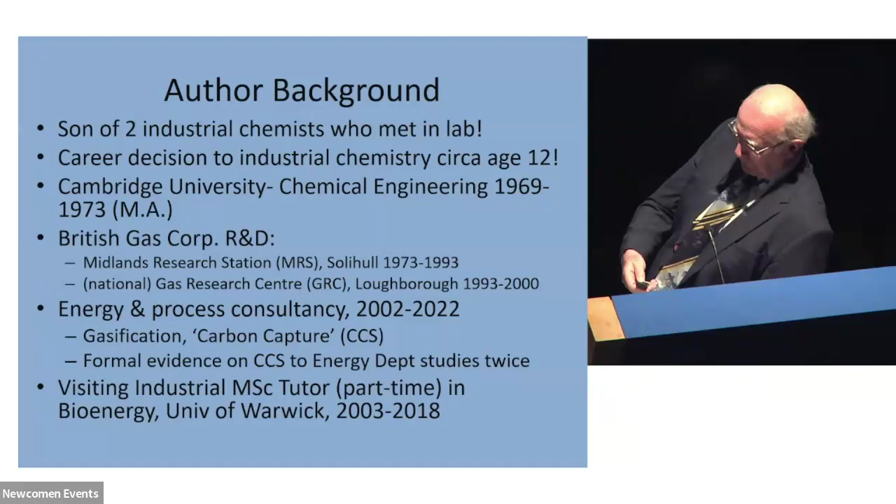And the forward. Damn forward clicker's not working. Oh, right, we got there. Okay.

Chemical engineering is riddled with jargon that's specialised to the sector, and British Gas is riddled with gas jargon as well. I've really tried very hard to eliminate as much as I can, but there are a few things left. I'm going to have to use a set of acronyms just for ease to speed the thing up. So here's a few of them. So NG is natural gas, MRS, Midlands Research Station, where I worked, TG, town gas.

Now I'm very fortunate with my audience here. I'm sure all of you in the live audience are old enough to remember when we had to make gas before it came out of a hole in the North Sea. And most of you are old enough to remember the old-fashioned gasworks using coal that you could smell from about 5 miles away. We'll be talking about that technology quite a bit.

One very important thing here is CV, gas calorific value. It's always done by volume in the gas industry because what gas pipes transport is volume rather than mass. So when we're talking about different gases, we have to look at their heating value by volume. Combined heat and power I'll mention briefly. US Department of Energy will feature at one stage, and there's a few units at the bottom here.

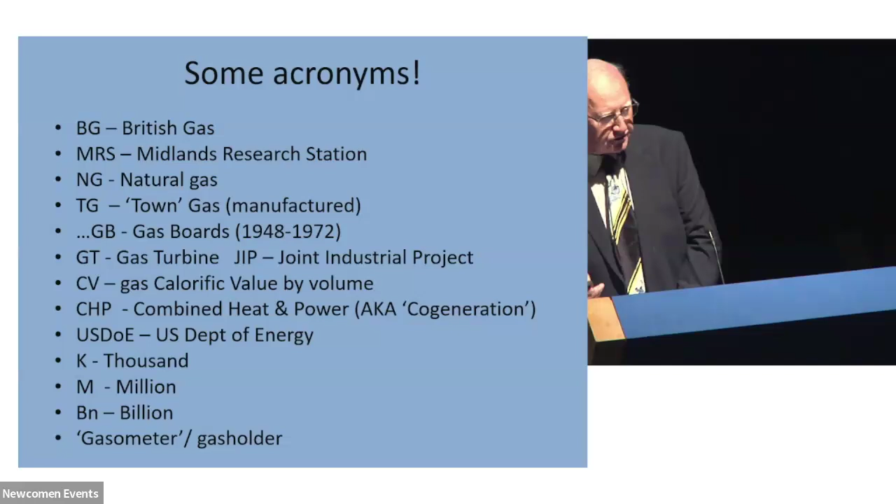And then the vexed question of gasometers. Everybody called them gasometers. That's not the technically correct term, they're gas holders. The gasometer was something that looked like a miniature version of a gas holder that was used for metering gas in the early days, and hence gasometer. But I'm going to use the terms interchangeably here because I know most people are familiar with gasometer. Okay.

So what we're going to do first, we're going to have a very brief romp through the history of an entire industry from 1793 to about 2000. And we'll just whiz through what the industry was up to. I'll then rewind back and we'll talk about some of the technologies in more detail.

So the original purpose of gas was for lighting, long before gas cookers or gas fires had been invented. And the main initial purpose was street lighting, but also lighting for factories and eventually lighting for the home. So the basic discovery, small-scale R&D, call it what you will, was the famous engineer William Murdoch in his cottage at Redruth in 1793 in Cornwall. You can still see the cottage, we'll see it in a minute.

The interesting thing is what happened next. Most people that know anything about the history of gas have heard about Murdoch and his cottage. Murdoch and his cottage don't make an engineered process that you can sell to anybody. So there then has to be an industrialisation of the process on a rather larger scale before you can use it for lighting Mr. Lee's cotton factory in Manchester. Well, all that work was done at the Boulton and Watt Soho Foundry, Boulton and Watt's second premises, which is still standing. And we actually know from historical records which room all this development was done. It was in a basement cellar.

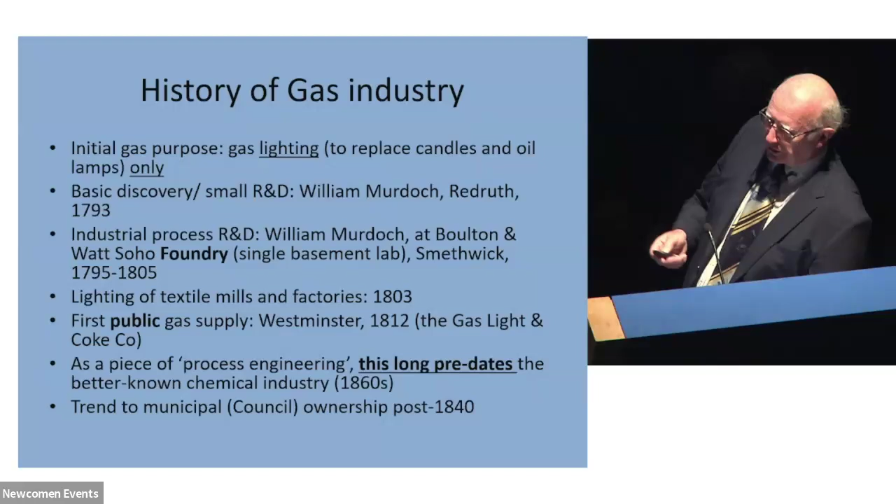Whiz through the history. I'm not going to describe all of these in detail. Boulton and Watt sold their first factory gas plant in 1803. From then, there's a few changes to the size and shape of the equipment, but basically the technology sort of stagnates for a long time.

The 1850s, they're starting to add other processes that are needed for winter peak demand. It happens with lighting because there's longer nights of darkness in the winter. And of course, once people start buying gas cookers and gas heaters, the winter demand starts picking up quite a lot. Well, that's a problem because the basic gas retort Mr. Murdoch was playing with isn't really flexible. You can't really switch it on and off. It has to be kept hot all the time, a bit like a blast furnace. So you need something else that can be switched on and off. And that's the producer gas process using air, the water gas process using steam, and then its improved version, the oil carburetted water gas process.

In terms of utilisation, as well as street lights, we have the limelight. Everybody knows the name. It's a real technology. You squirt a highly intense Bunsen burner flame at a piece of lime and it glows. So most places were using that. Gas cookers and gas fires and water heaters come along in about the 1850s. And it's a jolly good job they do, because in 1882, the first coal-fired electric power station opens in London at Holborn, Mr. Edison. And rapidly people realise electricity is really a far better method of providing light than gas is. Well, gas has to fight back.

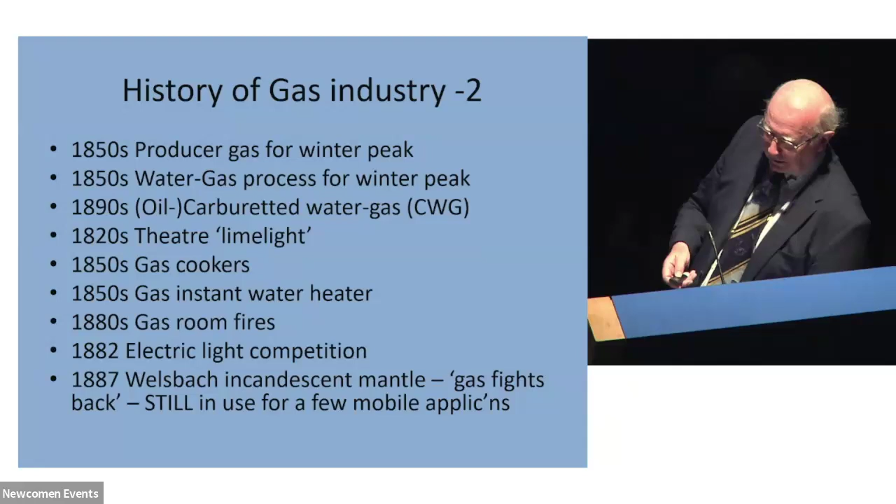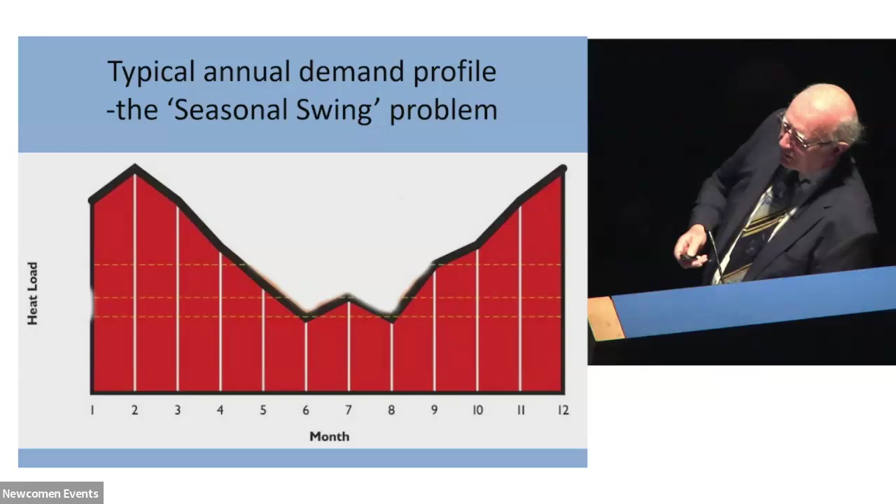How can you manage the gas system that flexibly? Well, can't we store it in those gasometers? Well, no. Gasometers are only capable of handling the swing between day and night, which is a very similar graph to this. You know, not many people use gas in the middle of the night once all the gas lamps have been switched off. So the gasometers are doing the day to night swing. They simply don't have anything like the capacity, even though we had a fleet of about 800 of them, they didn't have the capacity to do this seasonal swing. So we'll talk about the technologies that are used for that when we get further in the talk.

Right, I want to talk about CV, and I want to talk about a thing called enrichment. If you're going to change the type of gas you use, everybody's already got existing burners that fit the gas that came out of Mr. Murdoch's retort. If you now want to do something different, you've got to match the heating value, approximately, not exactly. It doesn't matter if the mixture of the molecules is the same or not. What matters is the heating value. So we're looking for a CV in old money of 500 British thermal units per cubic foot.

Now, the problem with these seasonal processes, these ones you can switch on and off, the producer gas is only about a third of that. The water gas is only about 2/3 of that. What that means is you can only blend quite small volumes of it into the main gas. Otherwise, the average heating value will drop too much.

Well, that was all solved with the carburetted water gas process, where some bright spark about 1900 realised if you squirted hot oil into the exhaust of one of these water gas generators, it would crack to smaller molecules like methane, and you could actually produce exactly the mixture you were looking for. Incidentally, the carburetted water gas process is one of the first ever processes to be fully automated, long before the chemical industry were doing it. They had crude forms of automatic control on these plants.

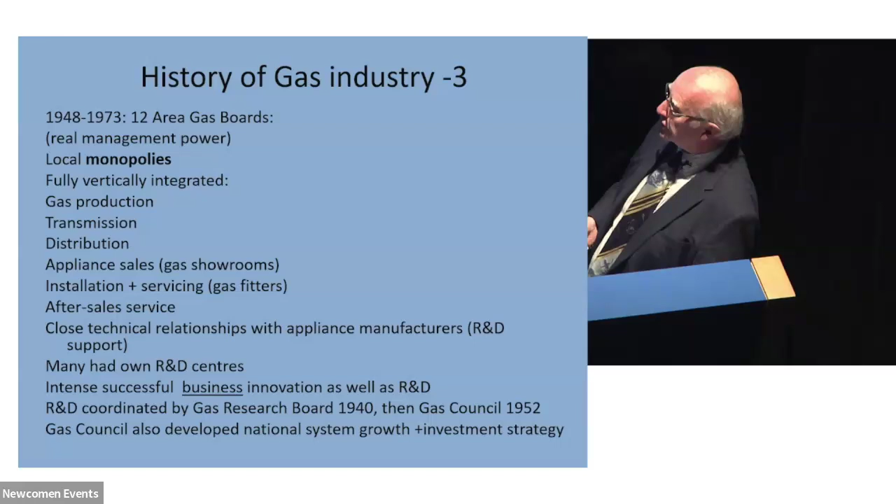They provided after-sales service, and they had very close technical relationships with the appliance manufacturers. They didn't actually manufacture the appliances, but they had a lot of influence in what the manufacturers did. So this is an era that some of us will fondly remember from before privatisation. Most towns had premises like this.

So here's our local West Midlands board example. There's a photograph of its headquarters top left. The current headquarters, well, I say the current because it's gone now, but the one from the 60s to 80s was moved into Solihull in a brand new building in 1962, and that was on an old gasworks site. There's just an air photograph of the old gasworks that was there before. And this site was actually shared with the research centre where I worked.

The company did a lot of business innovation as well as technology innovation. They really were right at the cutting edge of things. This was the largest open plan office in Europe when it opened, with over 1,000 people in it. It was so large that the postman had little electric trucks to drive between the desks. The business chief executives came from all over Europe to see this office, to learn how an open plan office worked.

They deployed the UK's very first private microwave system, and that was handling billing from 3 million customers over a range of about a 50 miles radius. All the calls were being funneled into this one centre, and what they were doing there was what we now call the call centre. So if all of you hate call centres, you now know who to blame and where.

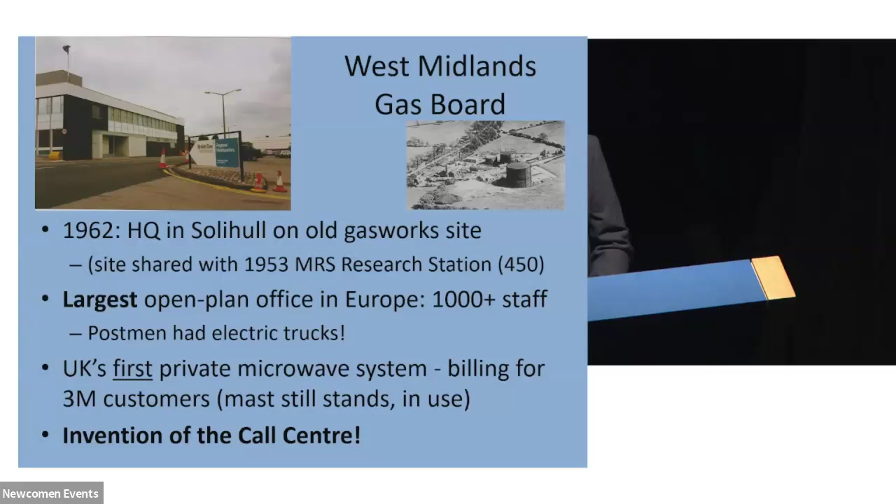The nationalised company inherited a stagnant and dying industry. The technology had not changed significantly since 1793. They were still cooking coal in pots, they were just rather bigger pots with a different shape. And the technology was stagnant. The technology required special grades of coking coal because you want to sell coke as a byproduct. And they were becoming increasingly short supply, and when that happens, the price goes up.

Unfortunately, the price they were getting for the byproducts of this gasification, which were mainly coke and various chemicals, were all tending to decline at the time, so they were in a real crunch. The processes were extremely labour intensive, with high labour cost, and recruitment was getting more and more difficult, and in a few slides we'll see a picture of why it was getting difficult.

The equipment had very high construction costs, inflexible production, and overall, the industry had an old-fashioned and dirty public image, just the same problem that steam engines had in British Rail in the run-up to 1968, versus electricity looked clean and modern. And electricity competition was increasing across the board, not just in the home with things like storage heaters, but in industry as well. So there's a graph of the stagnation.

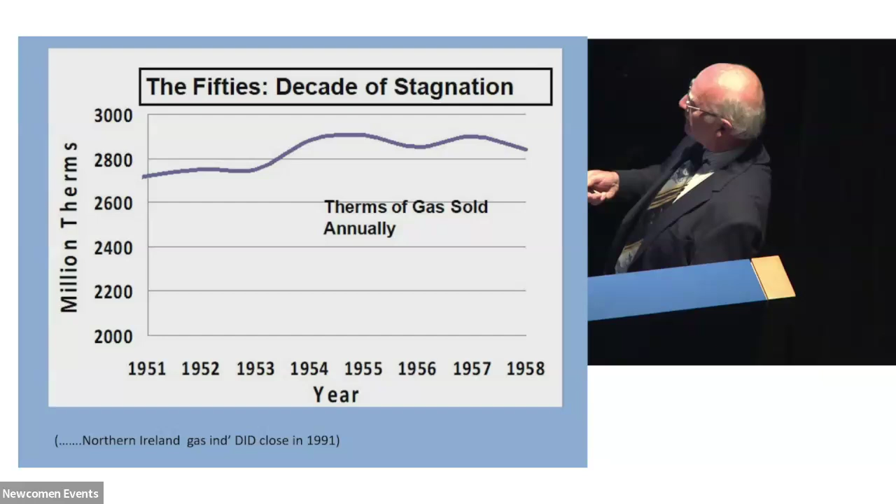So, what research do we need to kickstart this old, dying industry into something that's got a chance of survival? Well, we're very used to using coal. So step one is let's use advanced coal gasification, and we'll be seeing some pictures of this in a bit. The advanced version of the gasification can use a much wider variety of coals, so you're not restricted to these expensive coking coals. It's higher efficiency.

But more importantly, it's at higher pressure. And when it's at higher pressure, all the equipment squeezes down. If you double the gas pressure, you physically halve the size of the equipment. That makes it possible to build giant gasworks. So, for example, you could have one works supplying half of Birmingham. That was never possible under the old system, where Birmingham used to have about 10 gasworks with the old technology.

And the one that was chosen was a thing called the German Lurgi process. Lurgi is part of the word metallurgischer, because it comes from the steel industry. It's a high-pressure process, originally invented in 1935, using steam and oxygen. And this is total gasification of coal. We're not just cooking it with a rather low yield of gas, we're converting the whole of the coal to gas. And this had already been used quite widely.

The Germans had used it to run a vast synthetic oil fuel industry during World War II. They'd started doing it a bit before the war in 1933. And it's a very little known fact that World War II would have finished in early 1944 if the American Air Force and the RAF had succeeded between them in putting all these synthetic fuel plants out of action.

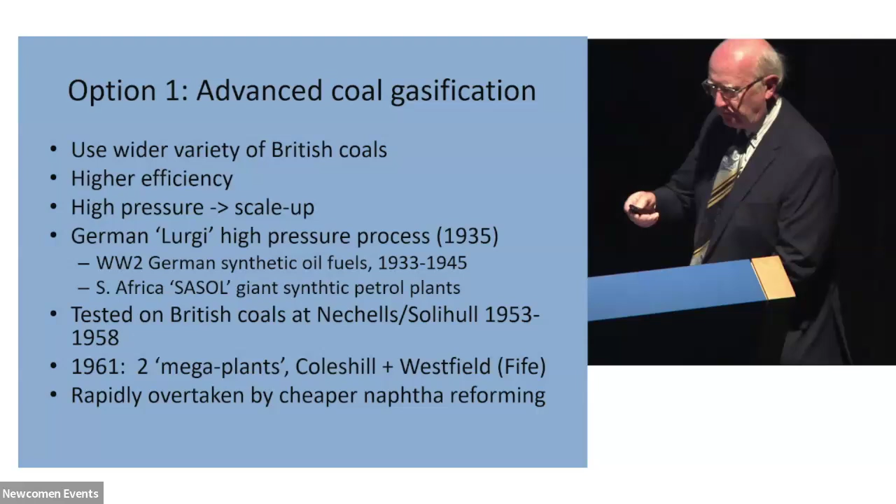And this would have been the future of British gas, except that it was rapidly overtaken by 2 new technology revolutions. So I'm talking about a thing called naphtha reforming. Well, what's naphtha and what's reforming? Let's take a look. What's naphtha? Naphtha is the chemical industry's name for low-octane petrol. Just think petrol. At the time, in 1960, the oil refining companies didn't have the technology to turn this low-octane petrol into petrol that was high enough to sell to you and me. So it became a surplus waste product available from most refineries at not much more than the price of coal.

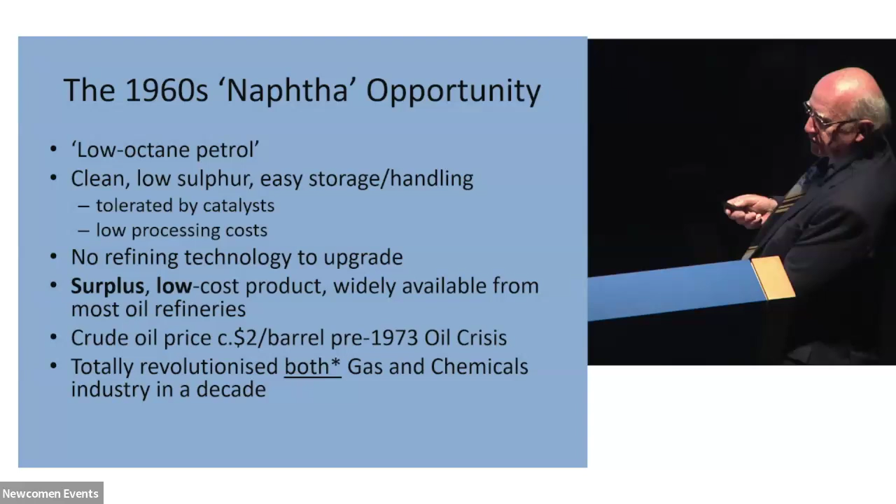I know it sounds crazy that they couldn't upgrade the octane. You'll have heard of tetraethyl lead, but this was too low octane even for that. It's a lovely, clean, low-sulphur fuel. It's easy to store, it's easy to handle, you can pump it like water. It's tolerated by catalysts because it's relatively clean, and most importantly, it's got very low processing cost. So you've got vast quantities of this low-cost material of very good quality available, and this totally revolutionised both the gas industry and the chemical industry. There was a total revolution to use this stuff. The chemical industry is using it still.

The process is highly endothermic. You have to put a lot of heat in to make it work, and that's why the whole thing's hanging in a furnace. So a third of the naphtha feedstock is being used in all these burners along the sides to fuel the furnace. So 70% is going down the tubes and 30% is being burnt as a fuel. So overall, you can make a process that is about 70% efficient. A few little details about the process here. Syngas is short for synthesis gas. Synthesis gas is amazing stuff. It's still the backbone of the global chemical industry today.

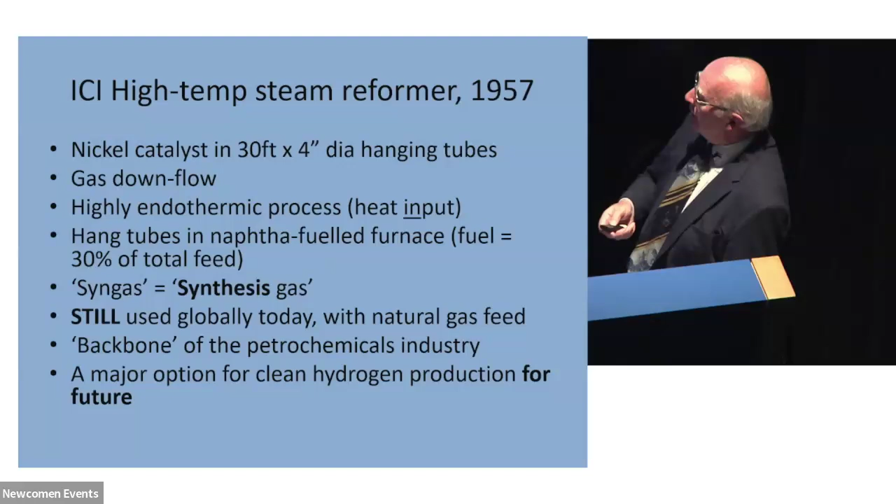If you have a mixture of carbon monoxide and hydrogen, you can choose any one of about 10 different kinds of catalysts, and you can make just about anything from it. You can make synthetic petrol, like the Germans were doing with coal gas in World War II. You can make hydrogen, you can make fertilizers, you can make all kinds of molecules, because they're both very reactive and there are catalysts available to convert them into things. So not only is it globally used today, I think something like 22 million tonnes a year of product last year, but it's a major option for making clean hydrogen for the future if we need a clean gas for the gas grid, for example.

Now, we're back to this enrichment problem like we had earlier on in the 1850s. The town gas CV target: we're aiming to match the CV of the existing conventional coal gas supply, because we don't want to do a national conversion back in 1960. So let's do a bit of clever process technology instead to tweak the thing around. Well, the basic ICI reformer only produces 350 BTUs, which is not good enough.

So what they added was about 10% of butane, which has got much higher CV, and the mixture would get up to about 500. Well, the problem with that is that butane was very expensive. So what we needed was cheaper methods of doing the enrichment without using butane. And that's where Midlands Research Station comes in.

Now, to give you some idea of what we're talking about here, these plants cost about a quarter as much to build as a coal plant. They need less than 1/10 of the staff because they're almost fully automated. And the naphtha is very cheap. So long as the naphtha remains cheap, great.

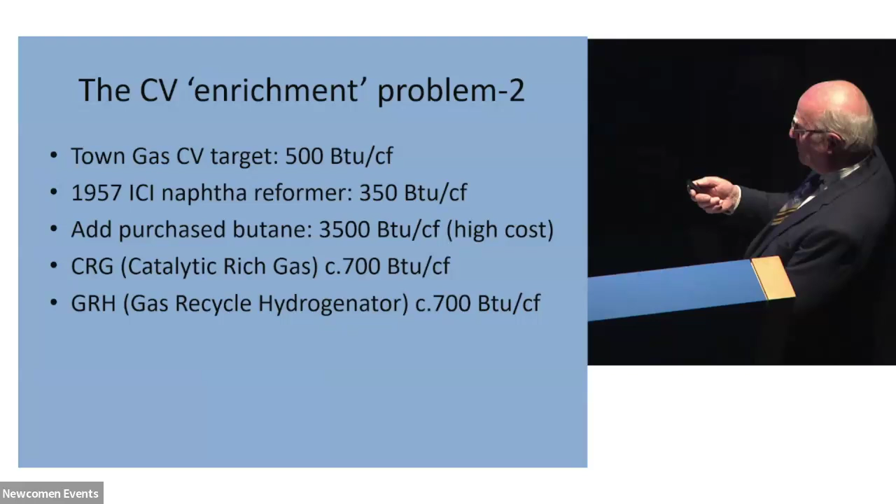So now I want to talk about two huge revolutions in the production base of the industry. I think this is quite unique. I cannot think of another industry that has been through two total 100% revolutions in how it makes its stuff within a 20-year period. The rate of technology change was just quite impressive.

So we've already talked about the advanced coal gasifiers. Revolution 2 are the steam reformers. This starts with some rather crude cyclic low-pressure reformers in the 1950s, but the key thing is this continuous reformer, this ICI one here, and then the CRG and GRH added to it that allow you to produce a match for town gas.

So the country, we built our last old-fashioned coal gas works in 1958. By 1967, when North Sea gas was discovered, we changed almost 100% to this new technology in 7 years flat, which is just quite extraordinary. I mean, the rate of change is ridiculous.

And then comes Revolution 3. People discover gas, North Sea gas in the North Sea. Well, good heavens. At a quarter of the price. A lot of very high technology needed to bring it ashore. So it's during this time, I'm trying to mix technology and business changes here, that British Gas Corporation is formed, which is the organisation I work for. The whole lot is combined into one big national company.

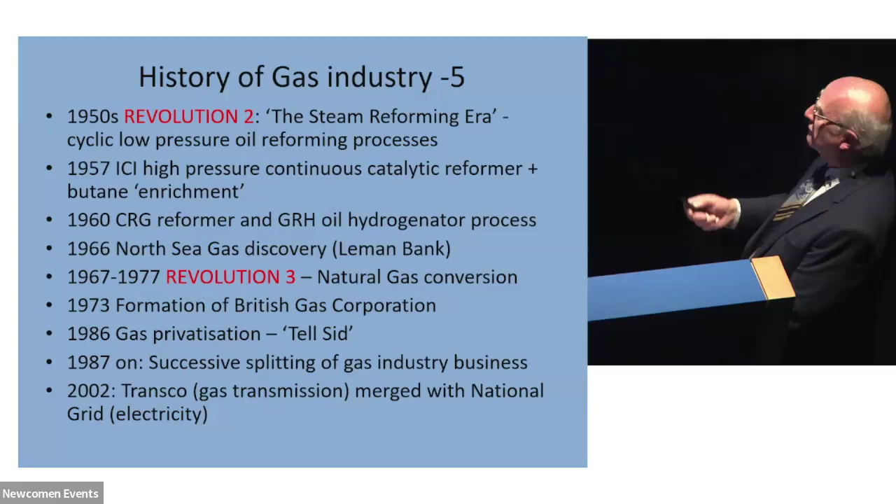Why is that important? When you operate at lower temperatures, the equilibrium of what you make swings, and you make mainly methane, which is much higher CV than the 350 we were getting out of the ICI reformer. So what this allows you to do is to mix together reformer gas and this gas to make this town gas mix of 500 that we're looking for. It's a very simple process. It's a single fixed catalyst bed.

And the other thing that happens when you operate at low temperature is the heat balance changes. So instead of being endothermic, this reaction now becomes exothermic because methane's being made, and the reaction will just run itself. It doesn't need to be set in a furnace. So you've saved 30% of fuel.

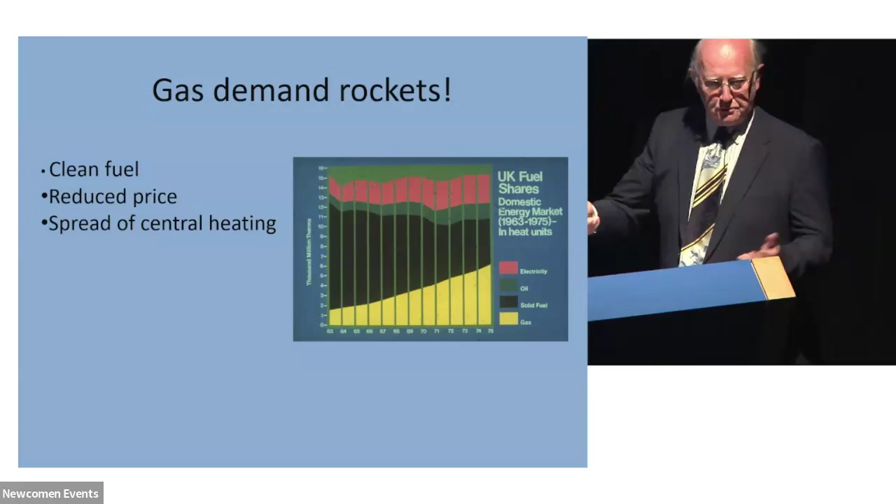And then all that gets replaced by North Sea gas. Well, you can't move North Sea gas around without a national gas grid. We never had a national gas grid before this. Gas was made in the towns where it was being used. Coleshill supplied Birmingham, it didn't supply London. So this gas grid has to be created from scratch using extremely high pressure pipes, because you need to compress these vast volumes of gas down into a sensible size of pipe.

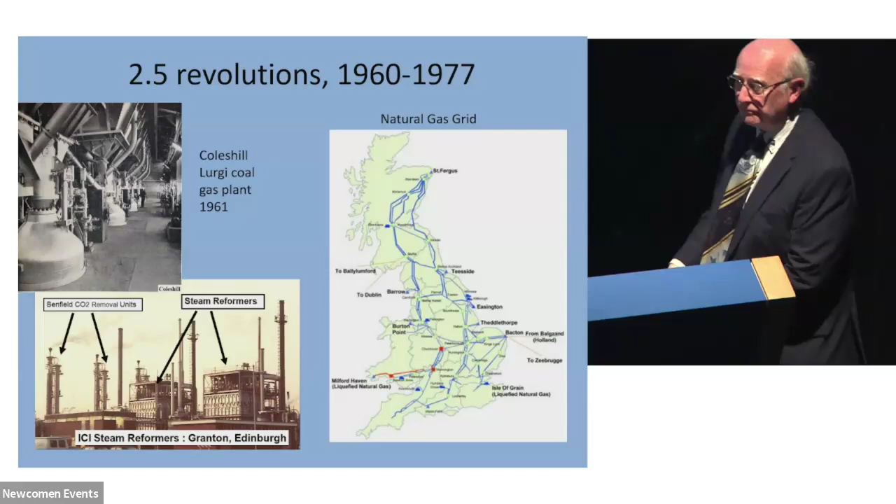Now, one pipe of about 1.2 metres diameter can shift about as much energy as 20 coal-fired power stations. We only needed about 4 major pipes coming down through Scotland to supply the whole country. Total dramatic revolution.

Now, the natural gas conversion. The problem with natural gas is it's got twice the heating value of the old town gas, so you now need different burners. It's twice the heating value and about a tenth of the flame speed that hydrogen had in the old town gas. The entire country was converted in 10 years. That is quite extraordinary.

It required enormous strategic planning at national level by the Gas Council. A complete bespoke management team was put aside. Here's some statistics here, just to give you an idea. Feel the width. You know what happened in your own road? Well, this is what the big picture looks like. 13 million premises containing 35 million appliances. Commercial and industrial, another 500,000 premises with another 2.2 million burners.

Every single burner's got to be replaced. It's got to be replaced right first time. It's got to be replaced safely without blowing people up. So you need a labour force of 11,000 staff, all of whom have to be specially trained on natural gas burners in 13 colleges. It's like running World War II. So it's widely regarded as the UK's largest ever peacetime operation for any purpose.

And British Gas was enormously proud of the success of this operation. Along the way, we created the entire new national gas grid you just saw, which didn't exist before. Total costs in 1977 values, it's a little under 600 million for the whole exercise, of which creating the national gas grid cost about 110 million. You've got to multiply those numbers by about 6 to today's prices. So we're looking at 3.5 billions worth of stuff.

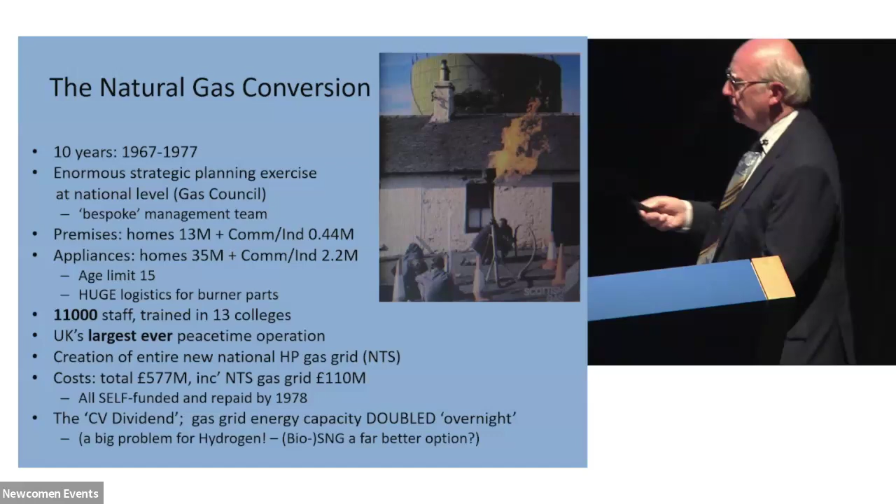Bit of a problem. I presume many of you can remember the old town gas being flared off at the end of your road. The conversion was done in a single afternoon in each road, road by road. And the whole thing ran pretty much like clockwork. We didn't even have to change the pipes under the roads. They all stayed the same. Some of them dated from about 1812.

Okay, so just a quick flash of the national grid being constructed. Just to explain, British Gas did not provide the technology for these gas pipes. It was all bought in, most of it American technology. But we were responsible for funding it, planning it, and all the rest. So how does the whole system work? We've got something like 280 oil and gas fields that have been used at one time or another in the North Sea over the last 50 years. An extraordinary number. That's why I said there were so many holes available to put carbon dioxide down.

All of that feeds into just 5 shore terminals, 4 on the east coast, 1 on the west. And now in this new era where we're importing liquid gas by tankers, we have 3 liquid gas importing terminals as well. And now we have 4 gas interconnectors, as they're called, much like electricity, to swap energy to and from the continent. So 2 of them go to Belgium and Holland, and 2 go westwards to Ireland. We run most of Ireland with our gas.

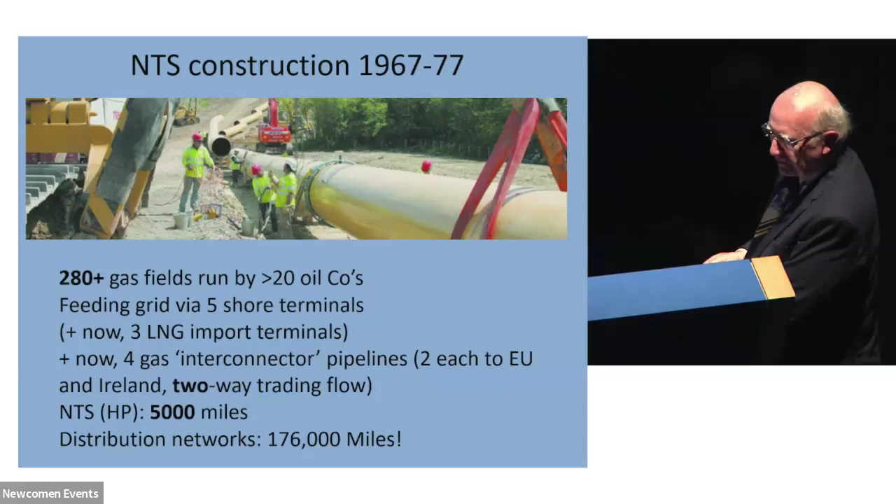The national transmission system, the high pressure stuff, this stuff, is 5,000 miles. It was built in less than 10 years. The distribution networks, which is what the gas industry had built over the previous 100 years odd, is 176,000 miles. I think that's more than once around the equator, if I remember.

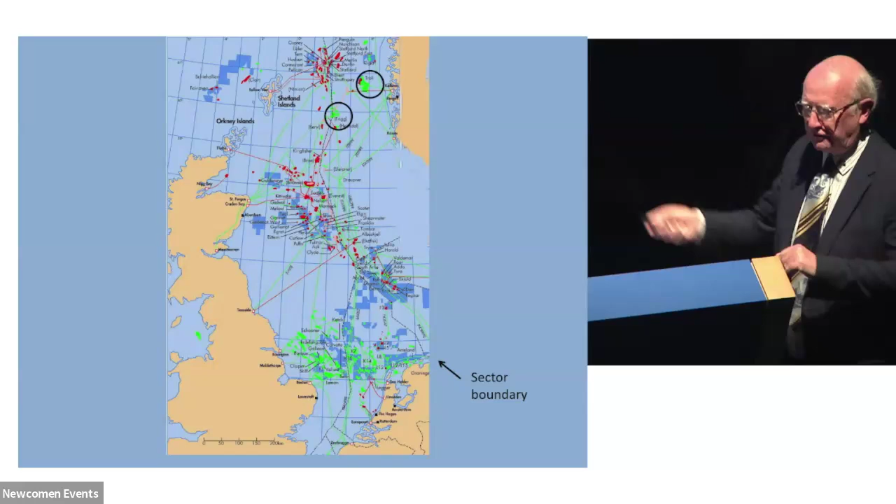By a stroke of geological accident, most of the oil and gas are within quite a short distance of the boundary. And it's quite arbitrary which have ended up on which side. This is just a piece of accidental geology, nothing to do with modern politics. But what I've highlighted is 2 gas fields at the top. The 2 largest gas fields in the North Sea are not in the British sector at all. They're Frigg and Troll, and they're in the Norwegian sector.

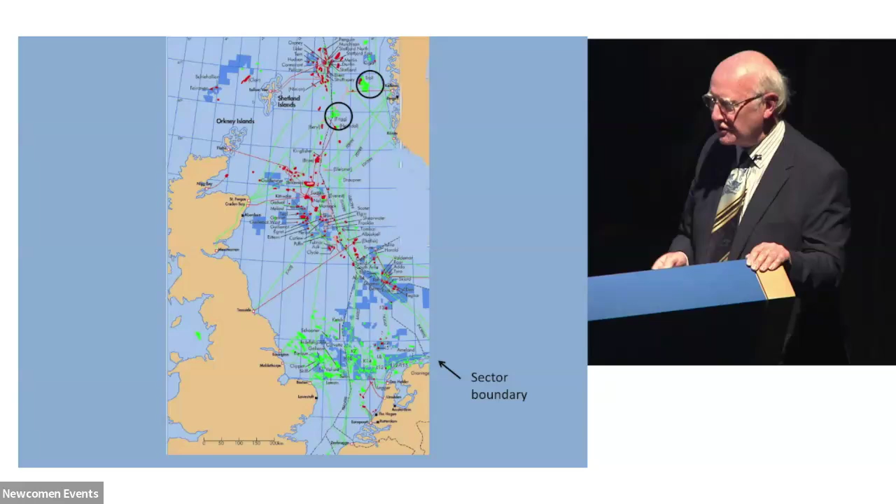Well, don't the Norwegians want their own gas? Well, not really. They've got a population of only 5 million, and because they have such cheap hydroelectricity, electricity is cheaper for them to use, so why bother? So it was much more convenient, mutually convenient, for them to sell it to us. So the UK has been self-sufficient in North Sea gas right until 2003. We have never been self-sufficient in British gas. That's a little secret you don't hear much.

A few quick statistics. I couldn't get all these on the same time period, but you get the idea because they all overlap with each other. Investment in North Sea oil and gas fields went up 16-fold, resulting in a production increase of 3-fold in 7 years and 9-fold over 20 years. At the same time, gas consumption, because you all rushed out and bought gas central heating, went up by a factor of 3. And the gas share of UK energy passed coal in 1993. A lot more recent than you might think, perhaps. But coal had been the vast majority of UK energy before.

North Sea gas production peaked in 2000. That number. Sorry. And by 2022, it was down to that number. That shouldn't surprise and shock anybody. It's like digging rocks out of a quarry. If you keep digging it away, there's going to be less of it left. So we're now down to about a third. And as a result, gas imports are now over 50% and rapidly rising.

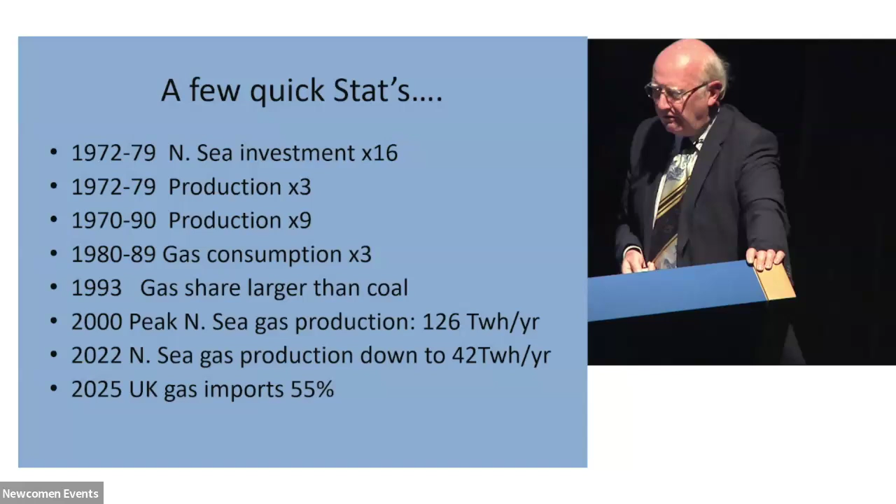But don't panic. This includes what's coming from our good friends, the Norwegians, that are still selling gas to us at very advantageous rates. All this panic you hear in the press about buying gas from Putin, forget it. The Hungarians and the Germans were in real trouble with Mr. Putin's gas. We only import about 5% of Mr. Putin's gas, so don't worry. It's not actually a problem.

Huge technology revolutions have driven this. This would not have happened without technology revolutions. Gas might have quietly died. It happened because this nationalised industry was engineer-led. It was led by engineers of real vision with the tools to make it happen. British Gas, I like to think, is the world's best gas company. It had a tremendous reputation for competence, for safety, for modernisation, cleanliness, all these things. And yet still we have this dreadful negative press that kept on whinging on about the old individual gas fitter that hadn't brought the right tools to mend your boiler. We have probably the most negative press in the world. Huge global reputation within the gas industry for technology. We have sold technology to virtually every country on earth. Technology and advice, how to run a gas grid.

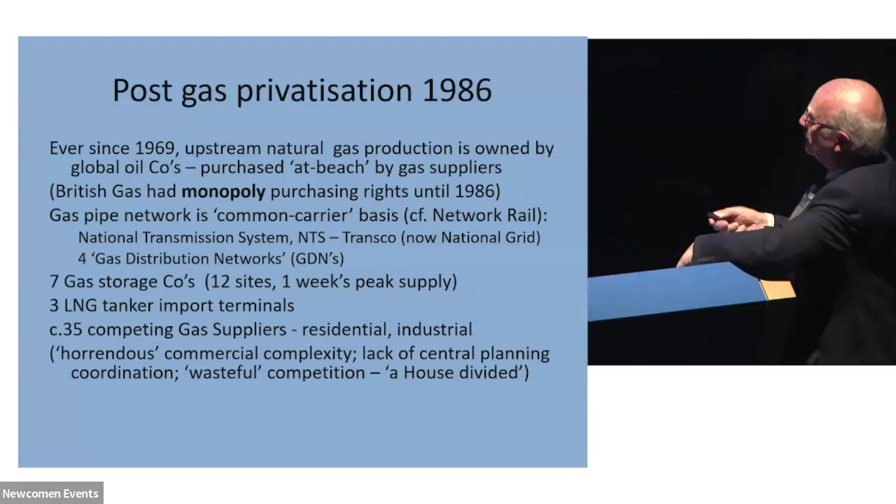Right, let's jump into some technology, shall we? Let's go back to Mr. Murdoch in 1793. What's this process he's using? Its technical term is carbonisation. You simply cook coal in a retort at a little over 1,000 centigrade for about 8 hours. And this basic process was in continuous use all over the world from 1803 until about 1958. That was when we built our last plant of this type.

You then take this hot gas out, you cool it and condense water out of it, because you make quite a bit of water in the process, and you extract and sell various useful things like ammonia and coal tar and phenol. Well, I can remember in my school lessons, and one or two of you may, seeing the diagram of the 100 different compounds you can make out of coal tar, including, would you believe, aspirin.

There was a massive coal tar refining industry. It was quite a big part of the... oh, and some of you will be old enough to remember National Benzole Petrol. That was coming out of these gasworks as well. It's the light fraction of tar. You then have to purify the gas because it's full of all kinds of nasty sulfur compounds, which is why you could smell these gasworks 5 miles away.

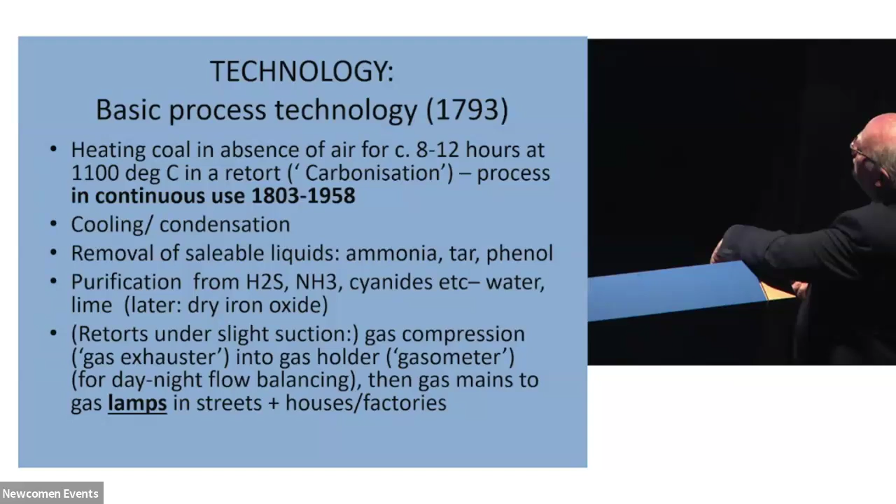Hydrogen sulfide, ammonia, cyanides, and this is done by washing with water. Most of these things dissolve in water. And then by lime initially, solid lime, you pass the gas through a bed of lime, and later on through dry iron oxide, which was cheaper and better. The retorts are run under slight suction. That's quite deliberate, because then if there's a leak, air will leak in rather than gas leaking out at 1100 centigrade.

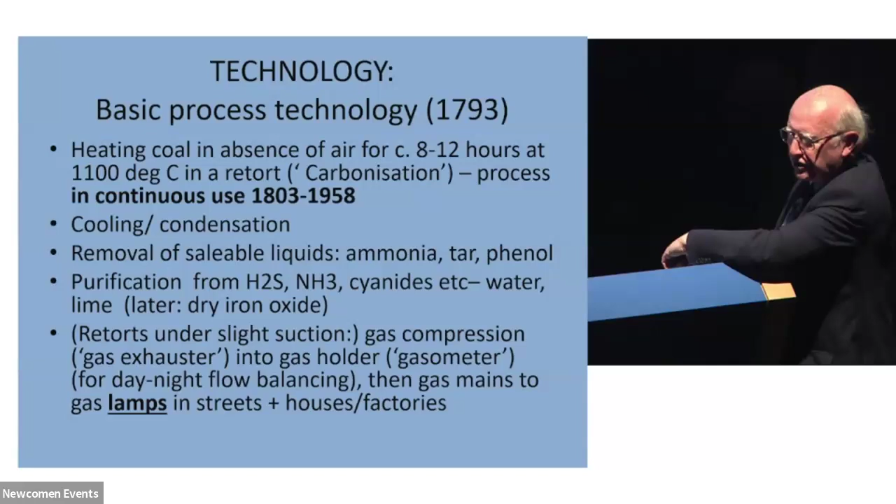So you then need a gas compression unit, a thing called a gas exhauster, driven by a steam engine, which is driven by a boiler, which is driven by the waste heat off the retorts, to push it into the gas holder. Now, the pressure in the gas holder is extremely low. I know they're big, impressive-looking things, and you think, good heavens, we're lifting 100 tons in there. The pressure per square inch is tiny. It's significantly less than the pressure you blow a balloon up with yourself, which makes it a very safe system.

And these gas holders, or gasometers if you prefer, are doing the day-to-night flow balancing and covering you over the weekend. Then through gas mains to gas lamps, remember, in the streets, and subsequently to houses and factories.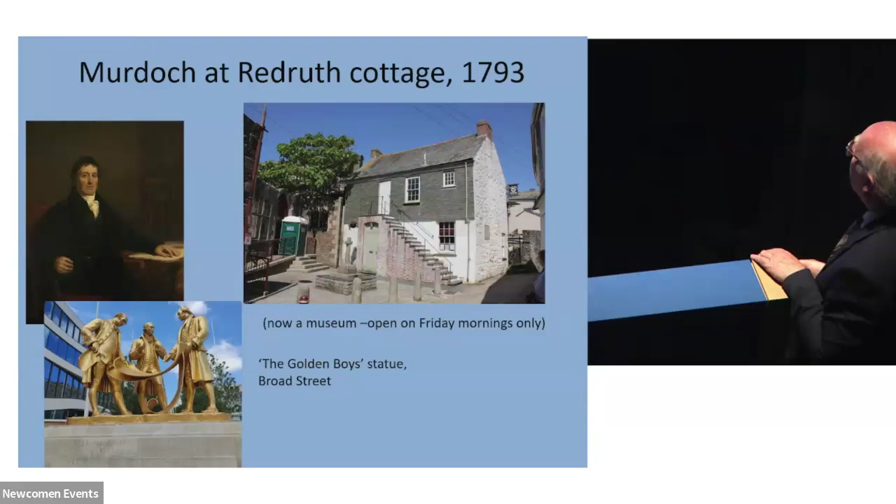And here's the cottage. This is where it all happened. It's now a museum run by a community group. Unfortunately, it's only open on Friday mornings, but if you're ever down that way, Redruth way, do go and have a look. There's a very good exhibition on Murdoch inside.

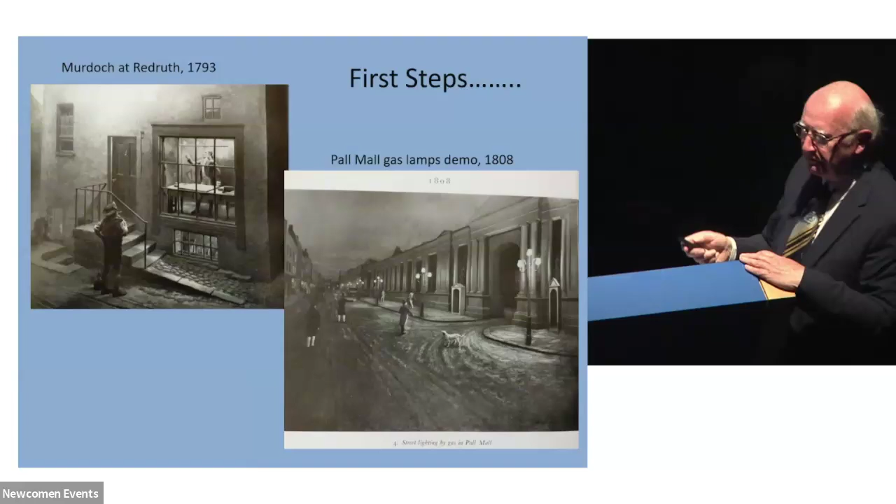I mentioned there were other promoters promoting gas light in London, so this was an early demonstration of gas lamps in Pall Mall, first ever demonstration of street lighting in the world. We have outstanding early gas infrastructure surviving in the West Midlands area. This fella, the Boulton and Watt Foundry, Soho, in Smethwick, which Jim knows extremely well, is where it all happened. This was where Boulton and Watt made their engines after 1795.

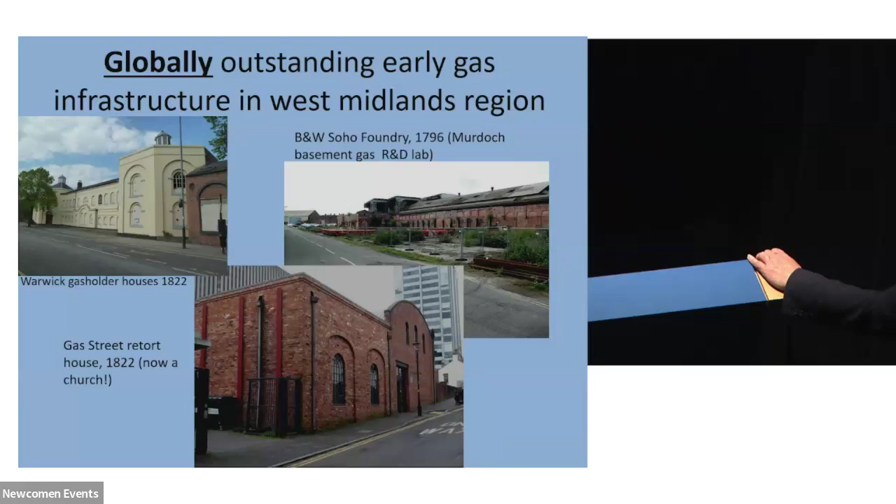The actual basement cellar, which was Mr. Murdoch's gas research lab, has been identified by modern archaeologists. We know exactly where it is. Problem with this, you can't get in it. It's a huge embarrassment to English Heritage. It's one of the world's most important industrial buildings.

The estimated cost of putting the roof right is at least 8 million. And it is at the back of the old Avery weighing works, now owned by an American company. So it's at the back of the works, which makes public access very difficult. But it is there, and it is important.

But down here in Gas Street, you all know Gas Street. You all know Gas Street means it must have had a gasworks once. Well, even Chris Hodrien didn't know that it still had its gasworks in 1990. It's an amazing discovery. Turns out this bit, the square bit, is the oldest surviving gas retort house in the world, as far as we know.

Then down at Warwick, we've got a very strange thing. They used to think it was a jolly good idea putting gas holders indoors, so if they went bang, the brick walls would stop the debris getting out. They rapidly discovered all it did was make lots and lots of brick shrapnel. So these were probably almost the first and the last gas holder houses built, 1822.

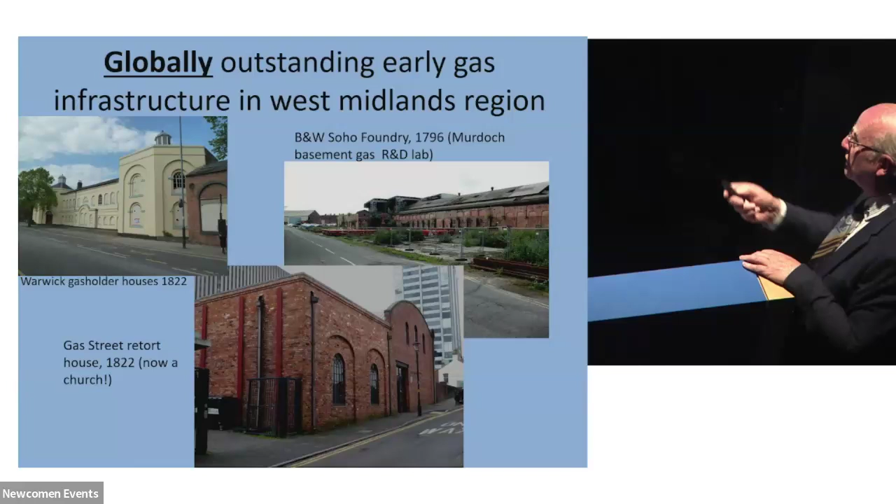I mean, they were completely abandoned within a couple of years of this fella. But it's still there, beautiful building. The gasworks behind it has gone, but the building's still there. So here's a lovely Science Museum model, not of Mr. Murdoch's cottage, but of the scale-up I was mentioning that took place at Boulton and Watt.

This is what turns the technology into a saleable proposition, initially for supplying factories, mainly textile mills, with gas light to replace thousands and thousands of candles. You might think gas is quite hazardous, but trust me, it's a lot safer than a candle. You can't knock a gas lamp over on your desk.

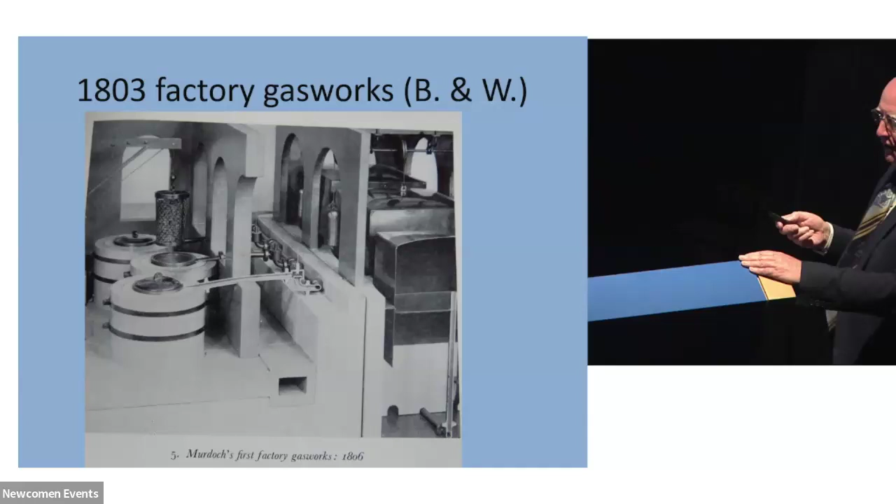So the technology has now evolved into large baskets of coal being dropped into pot-shaped retorts for about 8 hours at a time. Now, this is not a very good system because it's incredibly hazardous for the operator getting a basket of white hot coke out again at over 1,000 centigrade with gas flying all over the place. So it rapidly changes into the horizontal retort technology.

So these retorts are about 10 to 12 feet long, only about a foot wide. You can see the ends of three of them here. So you're looking into that building in Gas Street. This is an example of what would be in that building. And it would be open-sided exactly like this one is for gas safety.

This is not just a cutaway drawing. This is what they actually look like. So the front wall was missing quite deliberately because you don't want inflammable gas built up in a building. So we have the retorts here, we have the purifier here, and there's metering and so on going on there, and then off into the pipe under the road. So this fella is still there standing in Gas Street, but minus all its insides.

So we then develop what's called the bank of horizontal retorts, and typically they're in banks like this. You get between about 5 and 8 in a bank, and then if you want more, you build more banks. Now, working in this is about the nearest thing there is to working next to an active volcano. The stuff is coming out over 1,000 degrees centigrade, emitting large amounts of gas as it does. So it's all rather exciting.

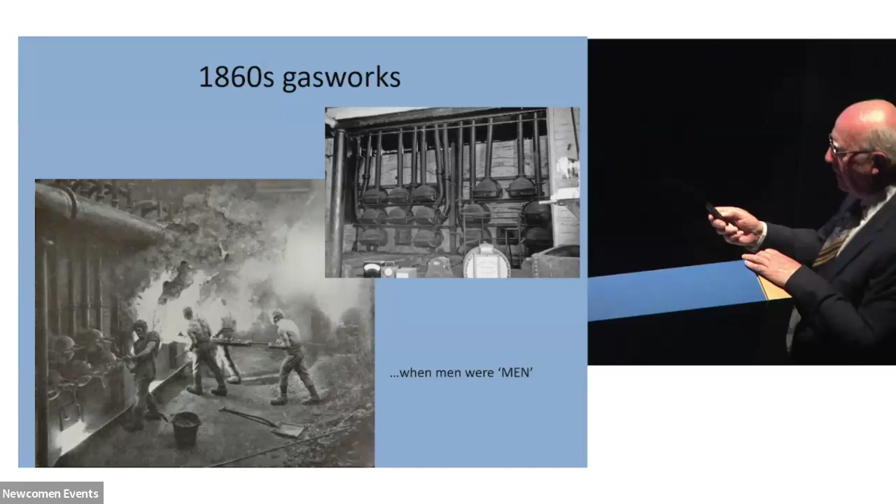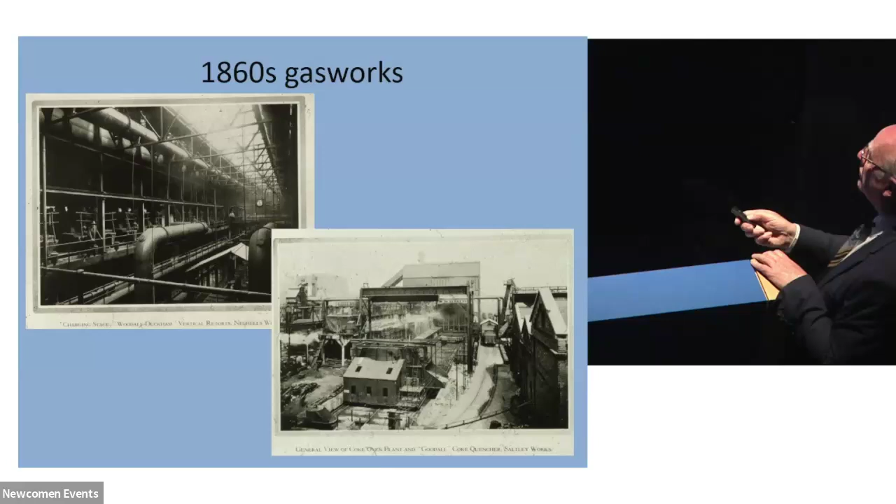And this was why they were having such difficulty recruiting new men to do this in the 1950s, because social attitudes had changed a little bit. 1860s, they've grown a lot bigger. So the left-hand one is Nechells, and the right-hand one is Saltley. We've got railway tracks feeding them, large coal handling systems.

A couple more pictures. Now, we've started to mechanise. This machine here that's running on railway tracks is a coal projector, as it's called, that can actually throw coal into the retort to save the men having to throw it in with their 10-foot-long shovels.

Next step is to have a double-ended retort that's open at the other end, and then the machine can also have a ram that will push the residual coke out. This is the last gasp of this technology. Mr. Murdoch would recognise this, the last gasp.

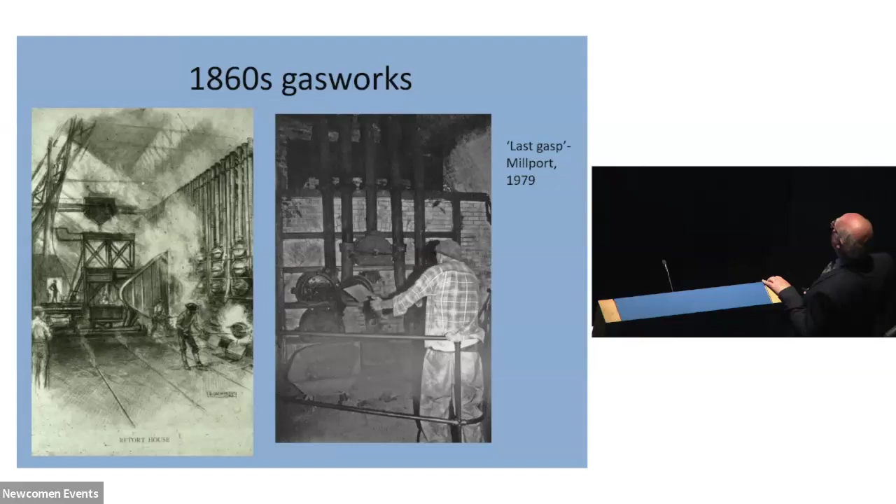Millport Gasworks, taken by Chris Allen, on an island in the Clyde. Because it was isolated, it hadn't been convenient to change it. And that's not quite the last shovel full of coal going in, but it only lasted about a year after this picture was taken. They were still recruiting stokers to do this job in 1978. Now, I wonder where they got them from.

So you can take what was an intermittent process for about 8 hours into something that's now continuous. You can feed coal in the top, and white hot coke will come out the bottom, and the whole thing runs much, much more efficiently. But the basic process is still the same. All you've done is change the way the pot works. Now, that's all research. They didn't call it R&D in those days, but that's what it was.

Where can we see this technology today? Well, if you want to go and see the little village gasworks, there's only 3 places in the UK you can do that. Fakenham in Norfolk, Biggar in the Scottish borders, and Carrickfergus in Northern Ireland. They've each got a complete village gasworks. I've still got a copy of the memo from British Gas to the government asking Fakenham not to be preserved because it was old-fashioned dirty technology that wasn't good for our image. But thank God the Science Museum overrode them.

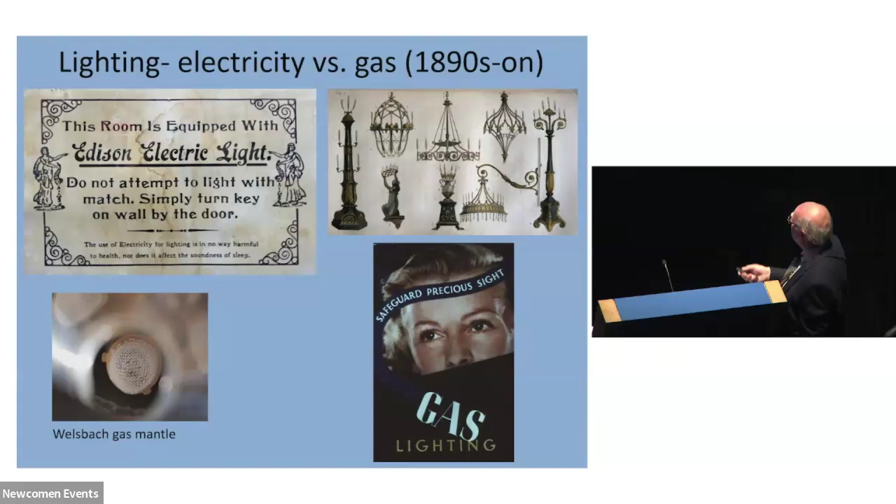And this is gas fighting back. This is a poster from about the 1920s, I think, or maybe even more recent. Yeah, they're saying gas light's better for you. Interesting, eh? And then you've got modern appliances being developed, thank God, otherwise the industry would have more or less collapsed. You've got gas heaters, gas cookers, and all the promotion to go with it. So these are fairly modern promotional posters from the 1930s. I think that's a 1920 one on the left.

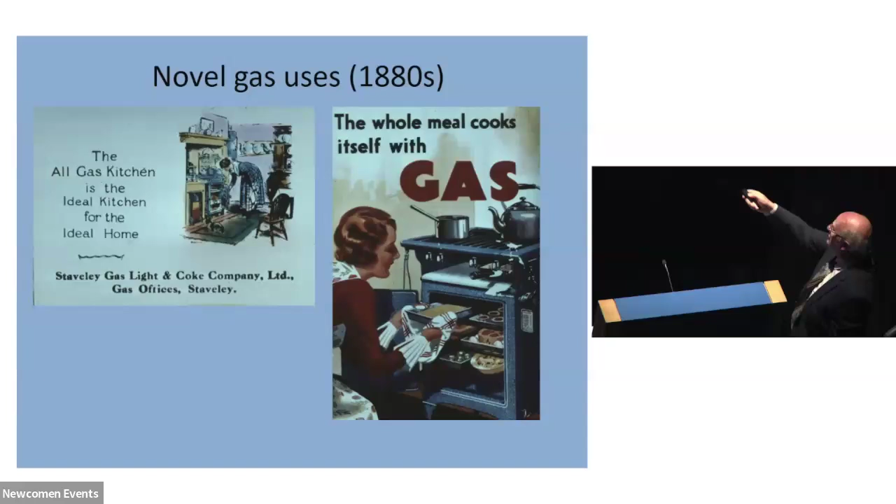This carbonisation process I keep talking about, cooking coal in a pot. Well, it goes by different names in different industries. If it's in the gas industry, you call it a gasworks, because what you want is this purified gas, which is actually only about 15% of what you put in. It's just worth so much, it's worth running the whole works for that purpose.

What are you left with? You're left with about 60% yield of solid coke. Well, that's also a smokeless fuel because you've driven all the nasty tars and things out of it. So actually, every one of these old gasworks was producing 2 smokeless fuel products, but it was the gas that was the one that was really worthwhile to them.

On the other end, if you're a steelworks, you don't care about the gas, and what you want to make is coke. So what you want is the same process, in the same pot more or less, to make metallurgical coke. That means it's technically suitable for a blast furnace. And the crude gas is now just the byproduct, and you don't even bother selling it to people. You just use it crude as a fuel in your own works. So there's the gasworks version.

Here's what we call a coke oven in a steelworks, of which the last 2 are just dying. The one at Port Talbot has died, and the one at Scunthorpe has also died, hasn't it, Chris? Yeah. We now have none of these left working in the UK. Now, this retort is a giant version of the advanced horizontal retort I was telling you about, where you push coke out at the end. So you have a big pusher machine, you can see it here.

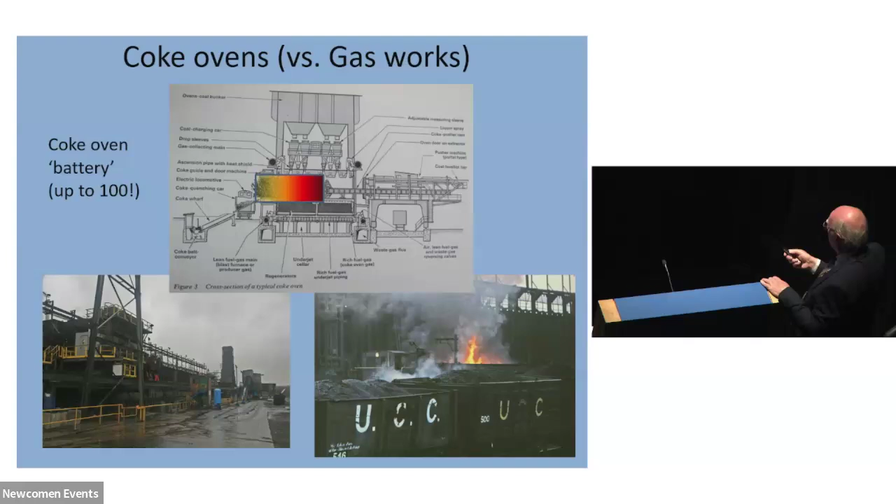Let's talk about the R&D role a bit more. Okay, so we don't call it R&D much before 1960, but it is R&D, obviously. Yeah, Mr. Murdoch is conducting R&D in Redruth, is he not? The technology development's been continuous since 1793. So long as you kept using carbonisation right up until 1958, it's all about build a better pot.

Can you make it bigger? Can you make it a bit more efficient? So there's progressive scale-up going on. That's very important. You've got to create an entire industry here. And there's this big change from batch production to continuous operation using gravity flow. And there's also this need for flexible gas output for the peak times, particularly the seasonal winter heating peak, for which you need these other processes we mentioned, producer gas and water gas.

Just to remind you, throughout this period right up to 1958, we have no national gas grid. It's all localised production at village and town level. There's a few local city grids, Birmingham as an example. By the 1960s, with those steam reformer plants, we've got a few regional medium pressure networks developing. There was one around East Anglia, for example.

But in 1964, we start importing liquid gas into Canvey Island, coming up in a minute. And there was actually a spine line, as it was called, that ran from Canvey Island up to Leeds. This is before North Sea gas had even been discovered. The line was not to supply natural gas to people, the line was to supply natural gas to reforming plants so you could turn it into town gas.

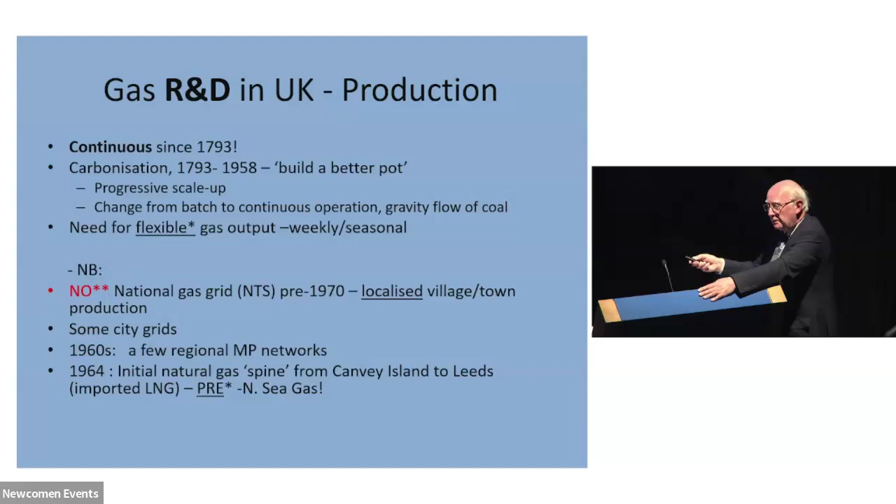Okay, so what happens post-1958? Well, we've talked about these huge technology revolutions. We've got total gasification of coal. I showed you that plant at Coleshill. Only managed to make 2 of those plants, although they're giant plants. Then it's swept away by the steam reforming revolution using this cheap naphtha.

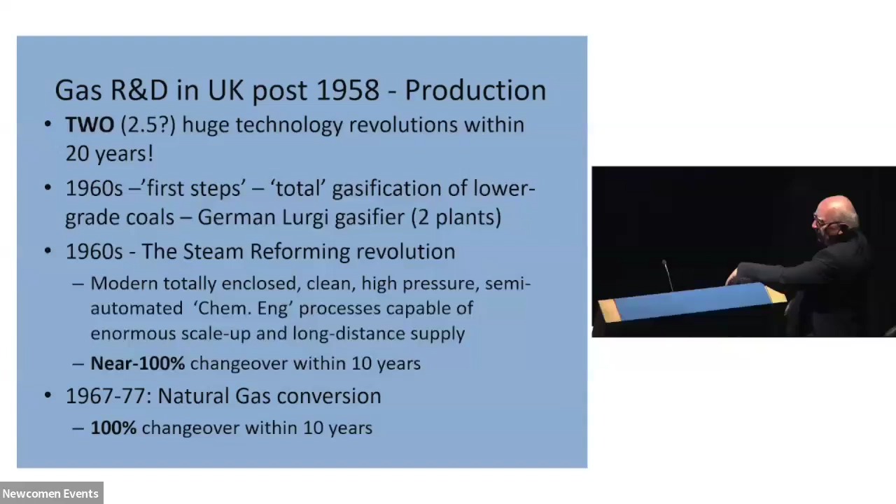And we've just completed that changeover, and North Sea gas comes on, and then we have to change over all over again. So the industry's been in total flux for 20 years, and that's pretty unique anywhere, I think. So I want to introduce you to my 2 heroes now.

They're very well known in the world gas industry, almost completely unknown outside the gas industry, which is a shame. Frederick Dent on the left started his gas research career at University of Leeds in 1932, working on that thing I called the CRG catalyst, although it wasn't called that then. So this technology goes back a long way.

He was extraordinary. He's widely regarded within the gas industry as the Brunel of gas. After he started at Leeds, he was the founder director both at the Poole Research Station in 1940 and subsequently Midlands Research Station. He retired in 1967. I never got to meet him, but everybody talked about him. And he was dead by 1973. I think he basically worked himself to death, a bit like Brunel.

Over on the right, we have the businessman. We have Sir Dennis Rooke. Now, he worked his way all the way up from apprentice on a tar plant to company chairman. In my opinion, that's how company chairmen should be made: somebody that fully understands how the business works and how the culture of the people in it works.

In passing, he had a key role in developing the world liquid natural gas tanker industry, which we'll come to in a second. No matter how senior he was, he remained an engineer-focused person. He was president of the Institution of Gas Engineers. He opposed the Thatcher privatisation in 1986 and got sacked for his pains. But he's a hero to all gas personnel.

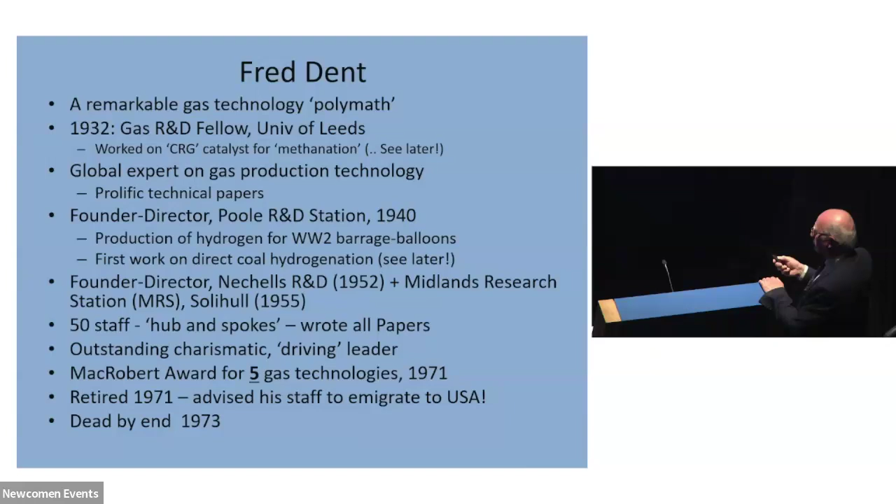He won the MacRobert Award for no less than inventing 5 different gas technologies in 1971. Retired, and because North Sea gas was coming in, he actually advised all his gasification research staff to emigrate to the States where gasification work was still going on, and he was dead by the end of '73.

I want to put a few personal flavours into this talk. Everybody has an ambition when they join an organisation, don't they? And many people want to be chairman. I didn't want to be a manager flying a desk. I'm a tech head. What I wanted to do was to invent something that my hero Fred Dent hadn't thought of. We'll see how I get on.

So Rooke has a rather long CV. I've listed it here. We can't go through it all. But highlights: he starts working as an apprentice on a tar works in London. It's part of the gasworks. Rapid rise to development engineer, that's quite a senior position in the South East Gas Board, in only 1 year. Goes on to take a key role in introducing this oil reforming technology into the industry. 1959, he's deck engineer on the world's first liquid natural gas delivery.

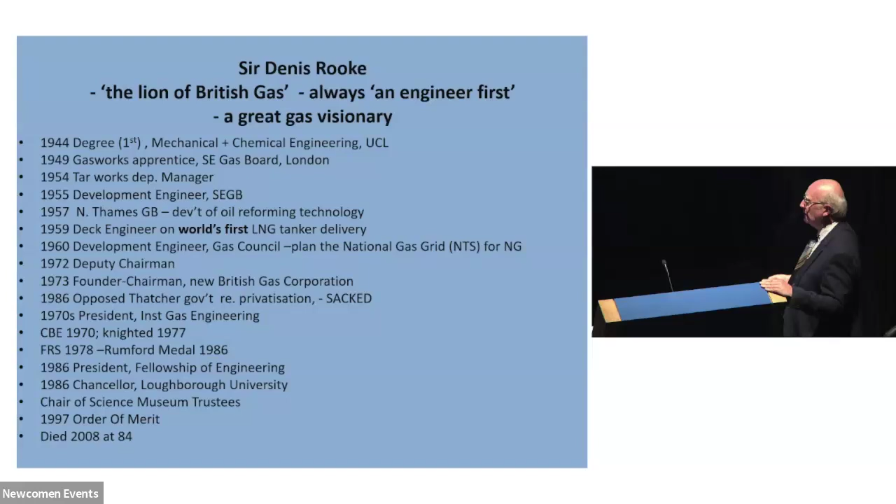On he goes, helping plan the national grid, deputy chairman, founder chairman of British Gas Corporation. Opposes the politicians because he doesn't want his industry messed around with and gets sacked for the privilege. Whatever the Thatcher government thought of him, here's what the professional world thought of him. He died much more recently in 2008. Another great hero.

So let's do a little aside into liquefied natural gas. We now have 3 liquid gas import terminals in the UK. They're responsible for about 10% of the UK's gas supply. Where did all this technology come from, transporting liquid gas at minus 160 centigrade in tankers? Well, everybody assumes it must be American. Well, it is sort of. It's a very strange story.

The Chicago stockyards, you know, those people that slaughter tens of thousands of cattle from the American Midwest and turn it all into processed meat, which then goes on to refrigerated ships. They were saying, well, we understand all this refrigeration technology. What else can we do with it? Oh, I know, we could refrigerate natural gas and put it on the barge and move it around.

So they actually originated the idea, and then the Gas Council jumped in with both feet in 1958 and said, we want a piece of this action. And then, of course, you've got a shipbuilder who's got to be responsible for converting the ship. So the world's first liquid natural gas tanker is called Methane Pioneer, and did its first delivery into Canvey Island in 1958. Things are very primitive. It's a converted old World War II Liberty ship, and the insulation on these high-tech tanks is balsa wood.

That then becomes a fully commercial process in 1964, importing liquid gas from Algeria, who have much more of it available. And Canvey Island has more technical innovations because it's got unique, novel French design in-ground storage tanks. You only have to build a concrete lid, and the rest of the tank is frozen soil. The tank doesn't have any walls. Very clever. Unfortunately, not quite perfect, but we haven't got time for that story.

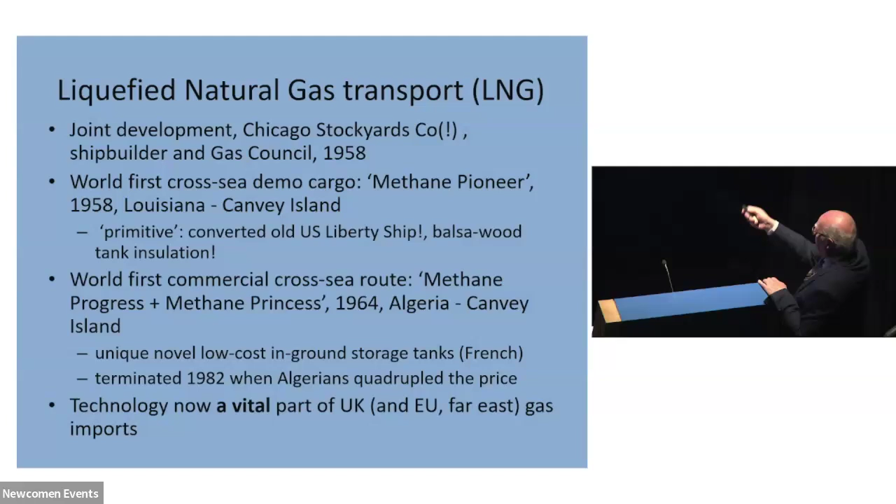That suddenly stopped in 1982 when the Algerians suddenly decided they were going to quadruple the price. Italy bought it instead because they were more desperate than we were. That's the thing about liquid gas tankers, you can actually move them around mid-voyage. What happens now is that Britain buys a tanker load of liquid gas, and by the time it's halfway to us, the Chinese have outbid us, and the thing turns round for China. That happens a lot. So this technology is now a vital part of everybody's gas imports.

LNG is now responsible for about 10% of all the gas that moves worldwide. It's a very clean fossil fuel versus oil and coal. Yes, it's still a fossil fuel. I'm not pretending it isn't. But it's a lot cleaner. It's got half the carbon dioxide emissions of coal. Large numbers of countries exporting it. Large numbers of countries importing it.

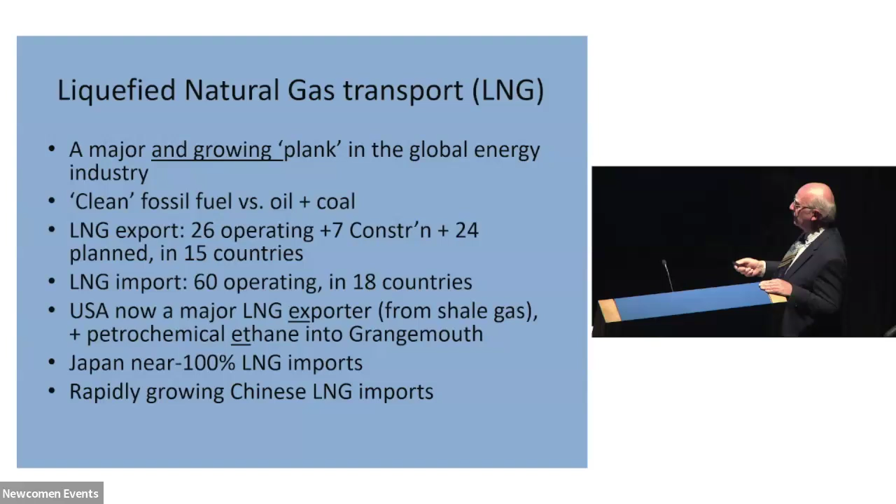Amazingly, we've had this shale gas revolution in the States, which is still gathering pace, by the way. The USA, from being a major gas importer, is now a liquid gas exporter. And they're also exporting ethane that's extracted from the gas as a petrochemical into Grangemouth. Japan runs on nearly 100% LNG imports, and the Chinese are gradually gobbling up the world's LNG market.

Right, let's go back to the mainstream. Let's go back to North Sea gas. There's an unknown story on North Sea gas. It didn't quite develop the way people think. The public sort of think one day there was no North Sea gas, and the next day it was 100% of our supply, or at least within 10 years when you built the grid. Didn't quite work that way.

Discovering gas fields is a very gradual process, and oil fields. We're still discovering new gas fields today. Nobody to this day knows how much gas is actually in the North Sea, however much geology has left us that we haven't discovered yet. But each field very rapidly declines in gas flow rate after you've opened it. Not surprising. You're sucking on a straw that's about 9 inches diameter from 2 miles deep in solid rock. As soon as you suck, the pressure goes down, so the flow goes down. So very rapidly, the balloon deflates.

And so Rough field off the Humber declined so fast that after only 10 years of operation, it was bought by British Gas to turn it into a gas storage field. And we pump gas back into it when it's surplus in the summer and then bring it out in the winter. And that's how we do that summer to winter swing.

I mentioned about half of the North Sea gas being on the Norwegian side. So one thing is the gas is only being discovered gradually. The second thing is that the demand for it is rocketing. So the industry's got to run very, very hard to stand still. So when I joined Midlands Research Station in 1973, believe it or not, the official strategic target was we might have to start making some man-made natural gas substitute, SNG, as soon as 1984.

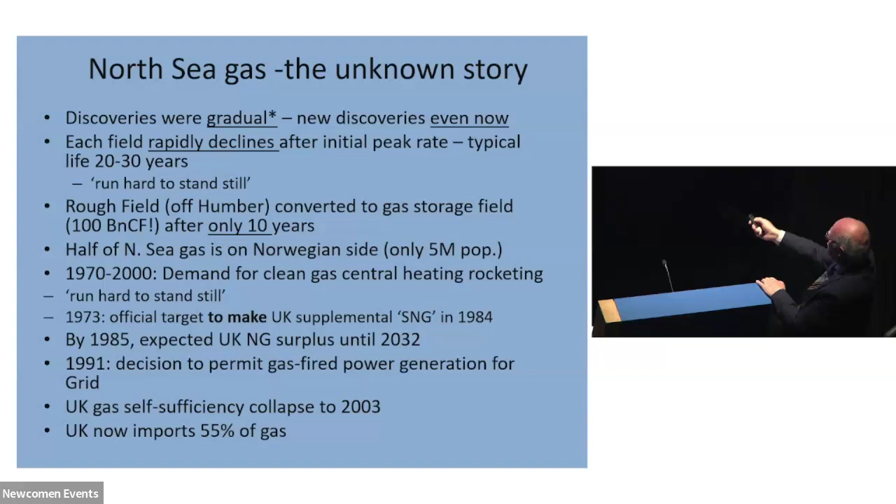Then there was this big strategic decision by Mrs. Thatcher and most of the rest of Europe, I hasten to add, to go for gas-fired power stations. Well, each gas-fired power station, on average in Britain, uses about as much gas as a city of 200,000 people. So your surplus position until 2032 rapidly collapses until we eventually crossed over in 2003. And the UK is now importing over half its gas. We could argue all night about whether that's right or wrong.

What British Gas did do was encourage the growth of the entire thing. As a monopoly purchaser at the beach, as a nationalised company, they were able to say, basically, you supply it and we'll buy it. Well, that's a bankable guarantee for the companies to go and get the investment they need to put the gas rigs in. The gas rigs on average cost about £500 million each, by the way. There was an attempt to influence safety standards, not terribly successful. We helped with the rapid learning curve of all the UK suppliers so the UK could learn how to do this.

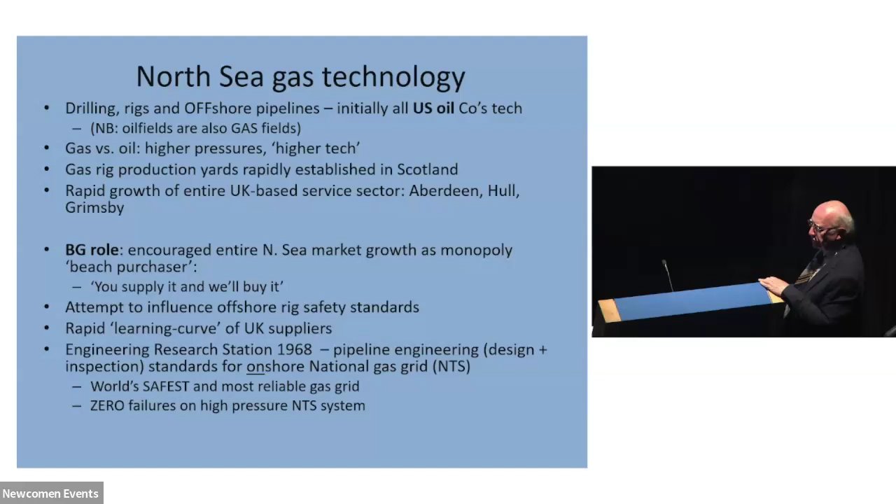And then the Engineering Research Station was founded in 1968 with the specific aim of developing all the pipeline engineering that was needed for the onshore grid, the national gas grid I've already shown you. The National Transmission System, as we call it, NTS. It's the world's safest and most reliable gas grid by a long chalk. There have been 0 failures on the national system ever since it started.

So let's look at the research stations. I've listed them here. And you can see some of them are quite old. They go way back, even before nationalisation. So these are old local company research stations, gas board research stations. But here's the list. So MRS is the third, and the Engineering Research Station, I just said, is the new baby on the field. But we've also got some quite large field test centres where bigger stuff is tested, and I've listed them there. Spadeadam is fairly near to Carlisle, fairly near to Hadrian's Wall.

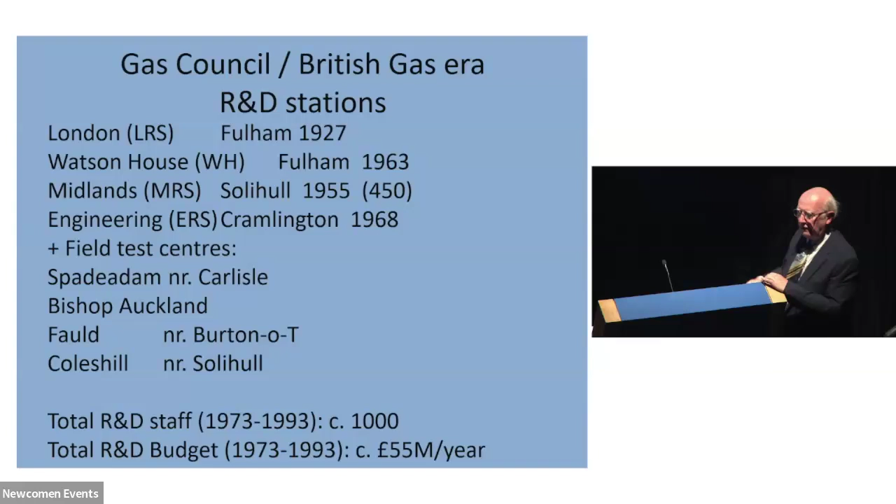So by the time we get to, let's say the 70s, we've got about 1,000 staff in R&D. It's the world's largest integrated gas research programme. And there's a budget of 55 million a year, which has been sort of forward guaranteed by the national company for at least the next decade.

So I've listed here the missions of the individual research stations. Watson House, that was in Fulham, by the way, was the centre of expertise for domestic appliances, gas cookers, gas fires, that kind of thing. London Research Station, also in Fulham, was the fundamental department, all the basic level stuff, first exploratory steps. We used to call it the University of British Gas. Midlands Research Station was where gas production and industrial burners were scaled up, and also the main centre for looking at gas safety issues. And Engineering Research Station was pipeline engineering.

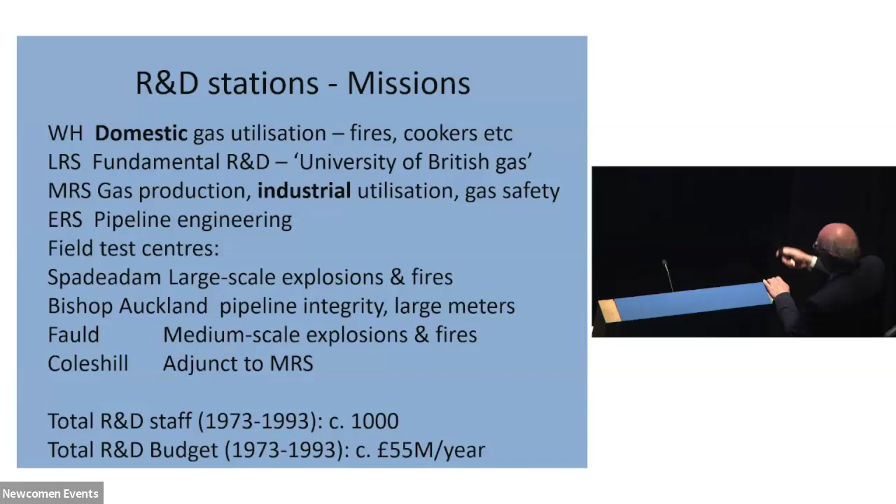Then you've got these field test centres. Spadeadam is the big boys' toys for people that like blowing things up. It's a very remote site. It used to be an RAF rocket testing station. And you can have full-scale gas explosions there with sort of fireballs, 30 metres in diameter, this kind of thing. Bishop Auckland was used to test pipeline integrity and accuracy of large meters. Fauld near Burton did medium-scale explosions and fires. And Coleshill was quite close to us, and it was just used for general purposes connected with the research.

So the general themes of all this, what makes research in British Gas rather special is that this is not like a university at all. This is very much the development end of research. It's heavy industrial R&D, and the reason for that is that virtually everything's under high pressure, because you're looking at stuff that's going to be interacting with the national grid at 1,000 psi. So we're not dealing with test tubes here, it's big boys' toys.

So these test rigs are costing sort of between about £500,000 and £12 million each in pounds of the day. Multiply that by 4 in your head. They are doing the designs for full-scale plants. That's going to cost £500 million to £1 billion each, because that's how we do it these days. Big stuff. Economies of scale.

So the test runs are not being done randomly. They're being very closely guided by computer simulation, which I was responsible for, optimising the cost and efficiency of full-scale plant. And then that guides the test runs you do. It's nearly all high-pressure engineering, as I said, and there's a lot of large-scale pilot plant testing going on. For example, full-size industrial burners being tested.

It was dedicated to technical excellence back in the nationalised days, with adequate budgets to make that happen. And we had very, very close relationships with the engineering departments of the company and the business departments, and very close relationships with the equipment manufacturers. It's very much applied research. This resulted in global level R&D leadership, and particularly global level leadership in safety research.

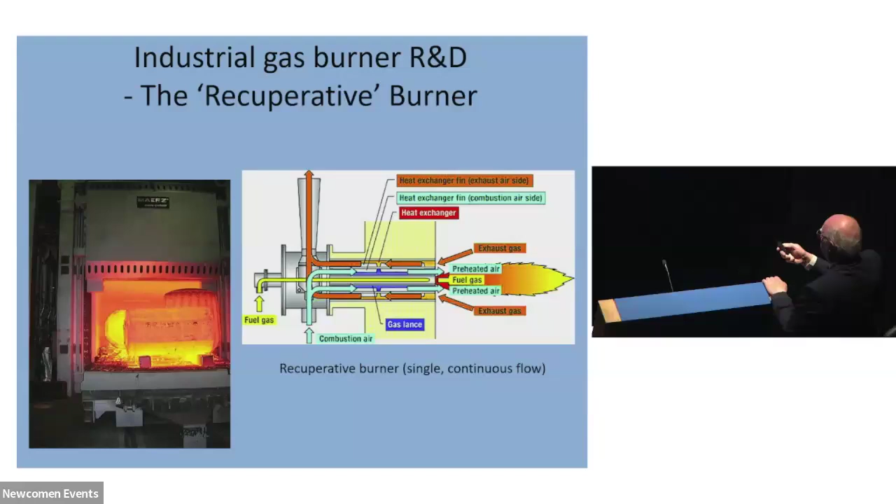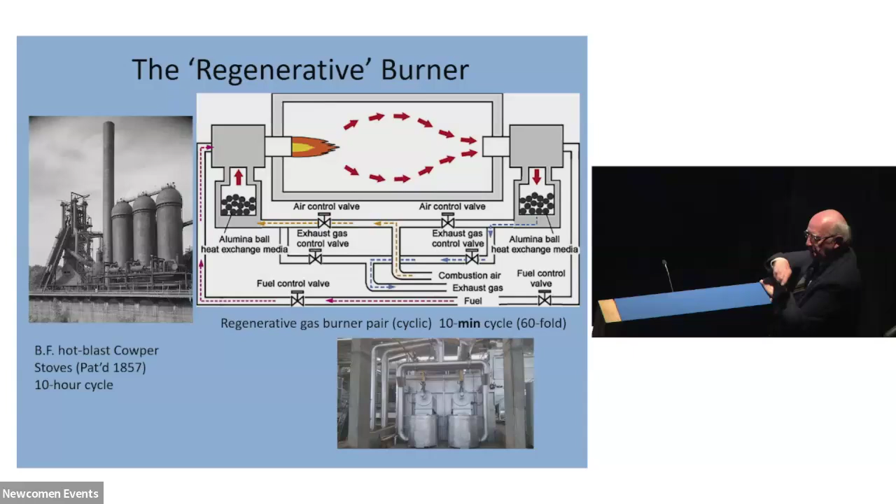And instead of taking 10 hours to heat one up, you can heat up in 10 minutes. So these things are now going 60-fold as fast, which means they're a 60th of the size. So your regenerator is now the size of a dustbin. So you can hang these all around the furnace. Now these are used all over the world. They've won all sorts of awards.

Then we went even further. A lot of metal bashing operation. Well, first thing to know is that big furnace I showed you a couple of slides ago, its thermal mass is so big, all the ones that used to be used with coal and oil heating, they're so big they simply couldn't be switched off. They not only couldn't be switched off for the tea break, they couldn't be switched off for the weekend. So they ran continuously whether anything was in them or not. Very, very wasteful, very expensive.

What can we do about that? Well, coal and oil are dirty fuels, which means you can't contact them direct with the metal. That's why the burners are on the outside of a furnace. What you can do with gas is it's a clean fuel, so the metal will tolerate having a gas flame directly against it. So now you can have something like a Bunsen burner on steroids. You can heat a piece of metal in literally less than a minute.

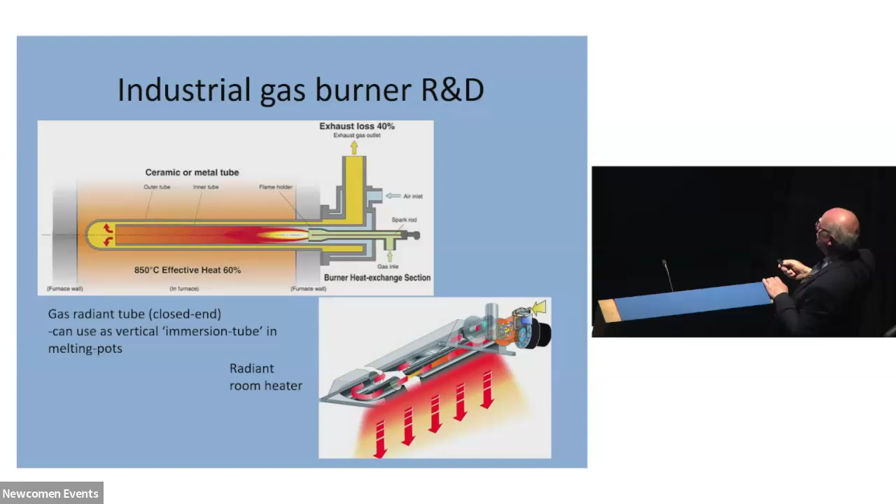So what's all this industrial burner R&D doing for us? Well, many members of the public say to me, why on earth would British Gas spend millions and millions of pounds developing burners to burn less gas? It's a very interesting question. Well, the company's that strategic. It's figured out that what's important is not how much gas you sell to each customer, it's how big can you grow your market share. You make it more efficient and cheaper for them, and lots more people will stop using coal or oil and use gas instead. And that results in things like this.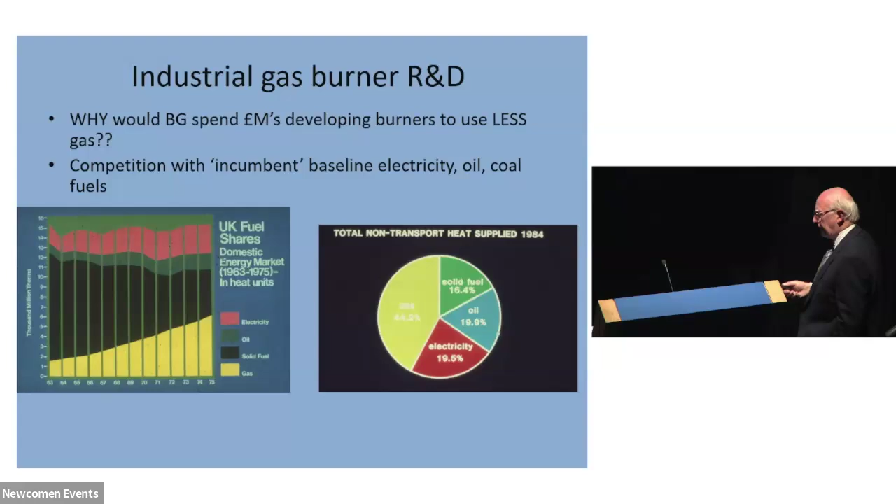So this on the right, it's a snapshot from 1984, and it's all the heat supplied in the UK for everything except road transport. Transport's a special case because it's nearly all running on petrol. It requires a portable fuel. But if you take everything else, all the homes, all the industry, gas was supplying 44% of all the heat used in the UK. Most of the public are completely unaware of this number. If you ask them to guess, they'd probably guess 20%, 15%. It's the biggest single source of energy in the UK, which makes what we're going to do next with the gas industry to make it green really very important.

Let's have a quick look at the safety R&D. This place called Spadeadam. It provides global leadership, not just for the gas industry, for the oil industry as well, because an oil explosion and a gas explosion are not that different. It's still expanding today. It's the one bit of R&D that's really survived in the world. It's coordinated a UK Explosions Liaison Group for over 35 years now.

It has global leadership in both the doing and the prediction of large-scale fires and explosions, developing all the predictive codes that predict what a big gas explosion will do if it goes off. The expertise is greater than the Health and Safety Executive has. That's widely recognised.

Some of you are old enough to remember the dreadful Flixborough chemical plant explosion back in 1974, a plant making nylon, where there was a mid-air explosion of a gas cloud. It flattened most of the plant and killed about 28 people. That was something that at the time people didn't even know could happen, a gas explosion in the open air. It's a thing called a BLEVE, a boiling liquid expanding vapour explosion, and it's extremely violent. You'll remember the Piper Alpha disaster when an entire rig burnt out completely and collapsed into the North Sea, and most of its crew died.

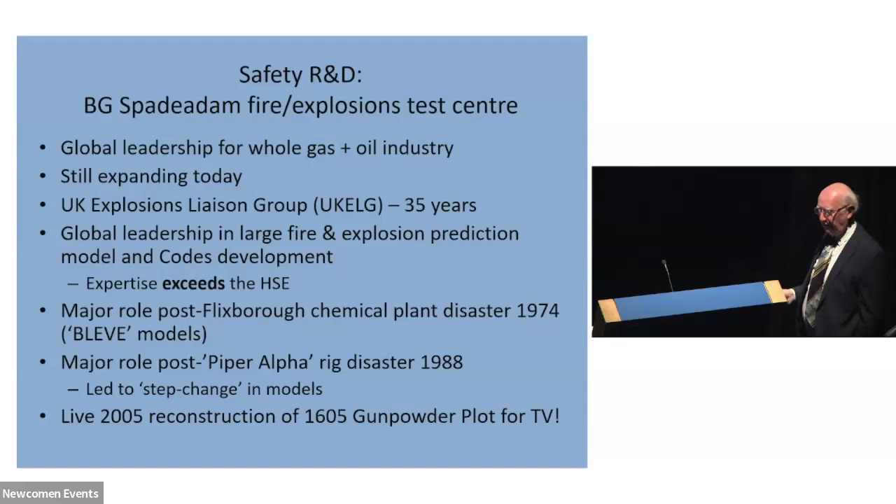Just in passing, they do other things. The TV asked if they could actually blow up a full-scale model of the House of Parliament at the time of the 1605 gunpowder plot. Just Google it. Go and look up the plot reconstruction. You'll find it. I don't have time to show it you now, unfortunately.

Here's a few examples, just a few pictures in the mind. This is the main pipe trench. This is a length of full-size 1,000 psi pipe sitting in a shallow trench. Now, why is it sitting in a shallow trench? Well, the original pipe's buried under soil, but as soon as an explosion occurs, all that soil gets blown away, and the thing is now sitting in an open trench.

This is a computer graphic, but it's a very nasty example of something that's nicknamed the banana split effect. If there's a crack in the pipe wall, the massive stresses can cause the whole pipe to unzip. And that process can go on for more than 10 miles. It's an absolutely devastating event. And that's why all gas pipelines have to be checked for integrity to make sure the cracks are small enough that it doesn't happen. And we know exactly how big a crack is tolerable.

This is the latest kit. This is brand new, only from about 5 years ago. World's largest explosion chamber going off. Oil and gas companies all over the world hire space at Spadeadam to do things.

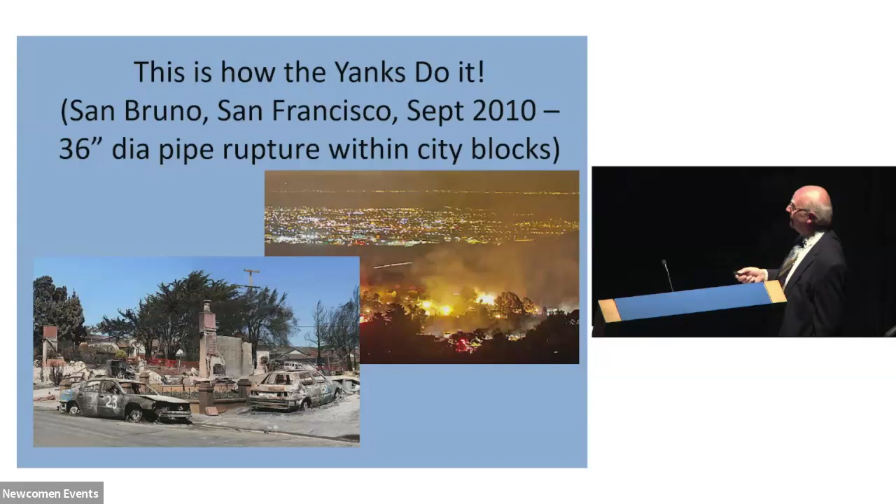Why are we spending £10 million a year on gas safety research? Because this is what happens if you don't. This is not a picture of the wildfires from last December. This is a man-made disaster right in the middle of San Francisco in 2010. Just the same effect as a wildfire. Killed quite a lot of people. That's why you need this kind of expertise.

Just want to talk very briefly about safety and perception, because the public perception of safety of these industries is completely wrong. Everybody knows about gas explosions in houses. They're always on the TV news, aren't they? Because it makes good TV. Oh, how many are there? Oh, 270 a year. Shock, horror, good heavens.

Well, what's causing them? Well, very few of them are the British gas mains under the street. The vast majority are in houses or blocks of flats. And an awful lot of them are self-inflicted because some idiot's trying to bypass the gas meter to save money. Many more are because they're failing to pay for their annual gas safety checks that they're all supposed to have. But it makes good TV and it usually gets reported.

Well, what's the death toll? Over a 5-year period, quite recently, the death toll was only 5 deaths, so 1 a year, and just under 200 injured. Well, there's another big problem, carbon monoxide poisoning. If your burner is badly adjusted, it can produce carbon monoxide instead of carbon dioxide, and it's a very poisonous gas. You all get warning signs about it from your gas company, I'm quite sure. What does that cause? Well, about another 200 deaths in 5 years.

Well, what's happening with electricity during this time? 70 deaths and 350,000 injuries a year. Do you ever hear any of that reported on the media? No. So gas is actually statistically very safe, especially as the industry transports 3 times as much energy as the electricity grid does.

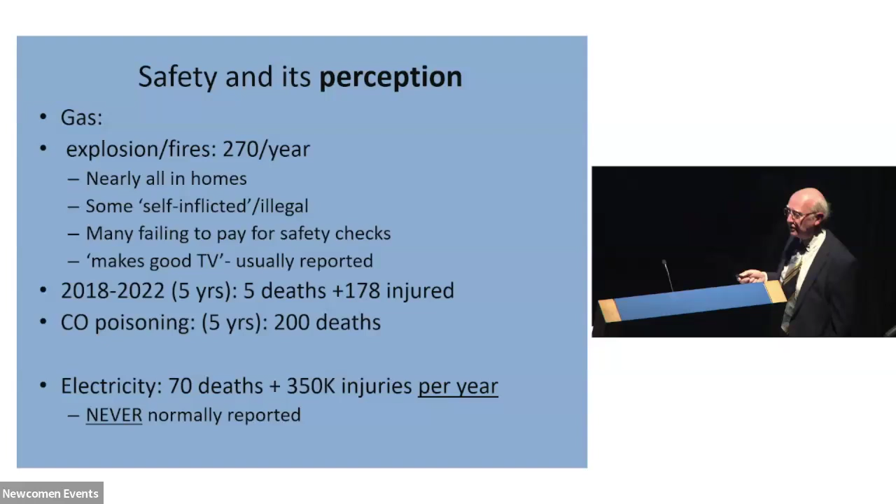Let's look at a few awards. Quick show of hands. Anybody heard of the MacRobert Award? No, I thought not. Well, you jolly well should have. It's the nearest thing there is to a British Nobel Prize for Engineering. It's named after a famous industrial entrepreneur who died back in the 60s. It's been going since 1969. It was funded by his widow. And nowadays it's administered by the Royal Academy of Engineering. They're the ones who do the judging.

It's awarded to companies, and it's only awarded for technology that's actually being used for real. So, for example, the first winners were the design for the Severn Bridge deck and the jet engine that powered the Harrier jump jet aircraft. Most UK winners have only won it once, and most have only won it for a single technology. British Gas have won it 3 times. 1971, it was awarded to Dent's team for not 1, but 5 different inventions of modern gas production processes. These are the naphtha reforming things we've been looking at.

1989, the Engineering Research Station, for the Intelligent Pig gas line inspection vehicle. Well, a pig is something you push through the gas pipe under the gas flow to clean it out. The Intelligent Pig is like a spacecraft in a gas pipe. We'll see a picture in a minute.

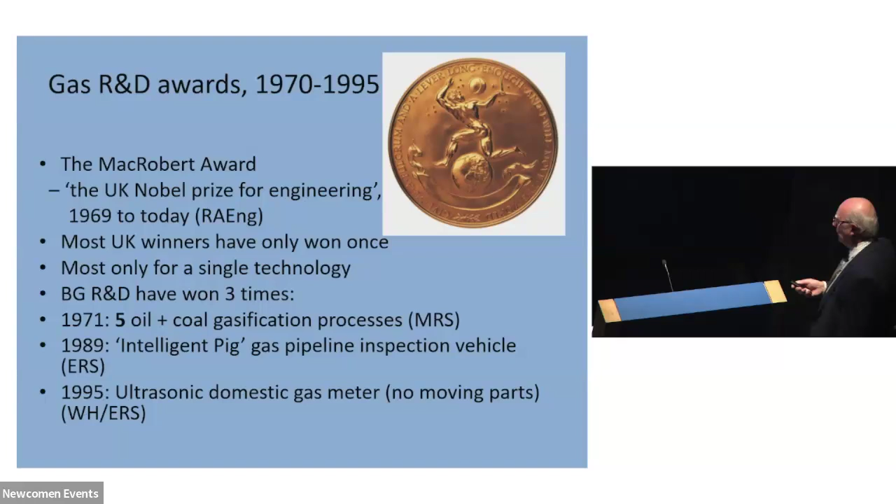You have launcher stations where you can launch them. It's just basically a T-piece off the edge of the pipe. You can depressurise it, open the door at the end, shove one of these in, and then swing the gas supply around and it'll pop off into the pipe. They run for maybe 50 miles. They're completely independent. They're in the gas supply. They have their own batteries, their own data recording. It's basically a spacecraft. It's completely remote from human assistance.

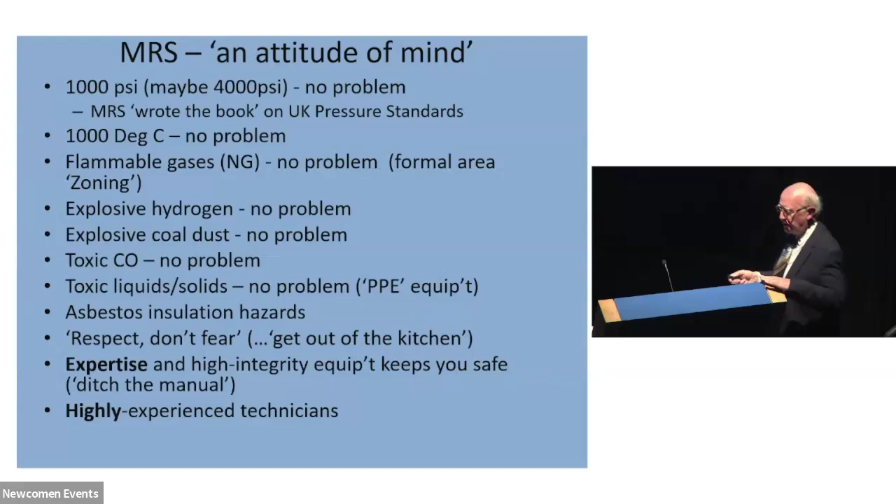The key issue is respect it, don't fear it. If you fear it, get out of the kitchen. What keeps you safe is your expertise. Ditch the safety manual, doesn't matter how many pages it's got, a safety manual will not save you if you don't know what you're doing. And highly experienced technicians that aren't going to make a mistake when they're putting all these high pressure rigs together.

So we plan for risk. There's these things called HAZOP, Hazard and Operability Study. When each new rig's being designed, you systematically have a team, typically about 6 to 10, that systematically go through every single event that could cause this plant to fail. And you go through what you're going to do about it. So you try and avoid risk where possible, but where there is risk, you deal with it. Because we were the major fire risk in the whole of Solihull, we had our own fire brigade.

Just so as we could start dealing with an event before the public fire brigade turned up. And all staff were trained on firefighting. And it's an amazing sight watching a secretary with a fire extinguisher on tackling a 3-foot square tank of blazing petrol.

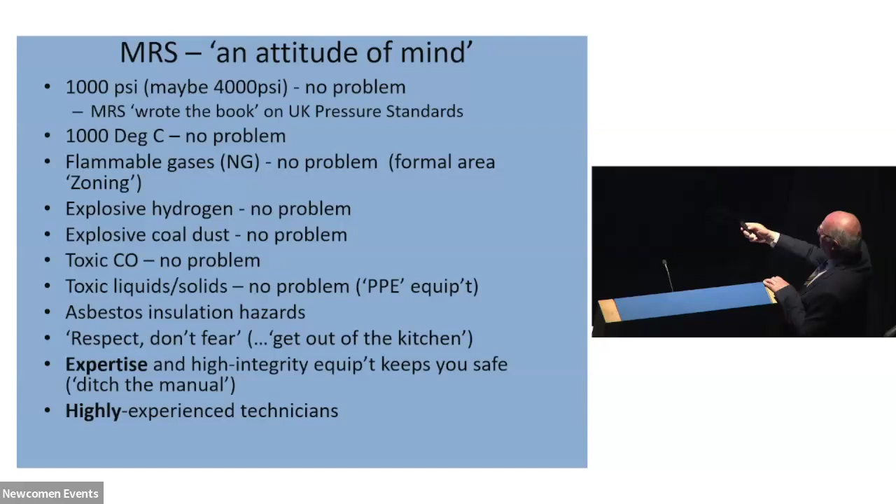Very extensive fire alarm system, as you'd expect, a formal evacuation plan, permanent site safety committee. I was a divisional rep on that one year, with British Gas headquarters keeping an eye over our shoulder. Our own permits to work system, monitoring contractors coming onto site. Sorry. I was permit to work signatory for a couple of years in my department.

There's our on-site fire brigade. Their equipment was old. They had their own firefighting appliance. Just an example of the sort of things that went on. I was talking about attitude of mind.

The CRG process, naphtha gasification, well, that was basically petrol. So we got three 20,000-gallon tanks of it on site, and they've got to be refilled through normal road tankers. So it's a regular routine. A road tanker turns up and somebody's got to unload it. Well, they're pumped into the tank, which is about 20 feet high, with a compressed air pump. And it's outdoors, and that's a problem, as we'll discover.

On my very first turn to do this, it was very nearly the end of my career. Some idiot goes and arranges a delivery on November the 5th. Not a good idea. I protest very loudly. Don't worry, he's coming in the morning, he'll be gone by 4 p.m., no problem. Well, of course, there's traffic delays. He doesn't arrive until 4 p.m., does he? It's freezing out there. It's dark. The pump keeps icing up.

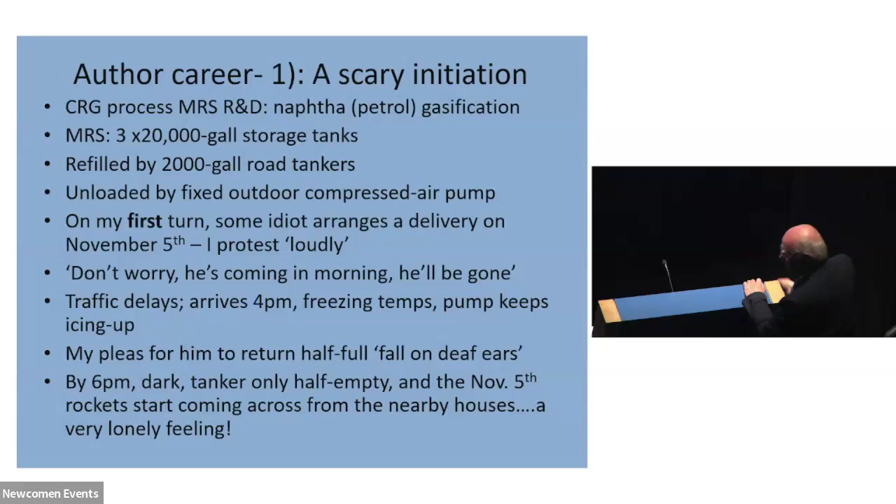My job is to stand out there in the freezing dark, playing a steam hose on this line, on this pump, to try and unfreeze it. I plead with him to take his half-empty tanker away. Oh, I can't do that. It'll upset my schedule tomorrow. So by 6 p.m., tanker driver's indoors having a nice cup of tea in the warm. I'm out there in the cold, and the rockets start coming across the canal from the houses opposite. That's how I wrapped up.

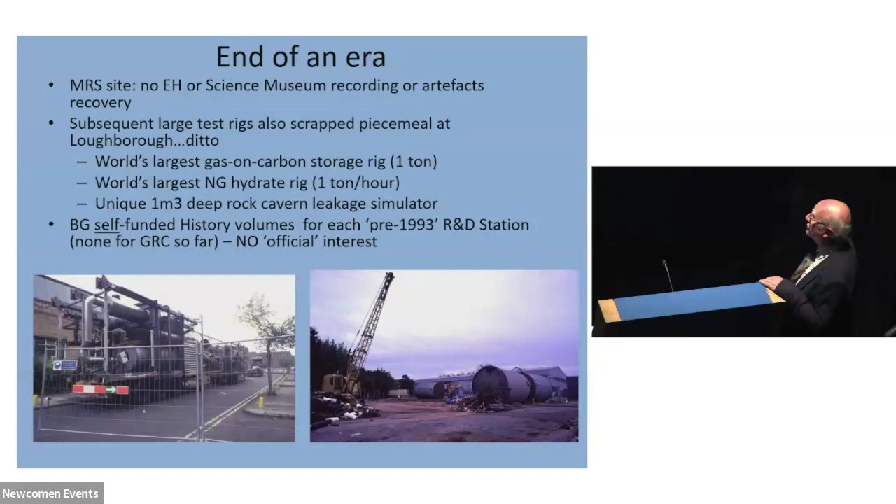This is how it all ended. After privatisation, the last act of defiance of the old nationalised British Gas was to build us a brand new national research centre at Loughborough. It's on the end of the university site, for 1,000 staff with expansion to 1,200. The old MRS site was sold off for housing. Well, was this world-class gas research centre properly recorded by either English Heritage for the buildings or the Science Museum for the equipment? No.

Subsequently, when we moved to Loughborough, large test rigs continued to be scrapped. The world's largest gas on carbon storage, that was my project, a ton of carbon. World's largest project for making natural gas hydrate, which is gas trapped in ice cubes for transport from one country to another, scrapped. That was my project. Well, in fact, all three of these are mine. A totally unique deep rock cavern leakage simulator. We were simulating a piece of rock 1,000 feet underground with a crack in it and actually measuring how fast gas got through it.

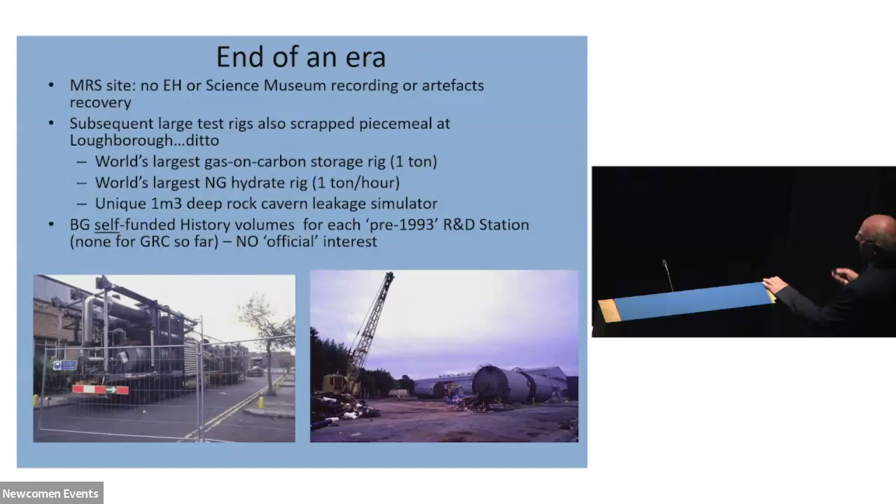A new director was appointed. We'd never ever had a director who wasn't a proper researcher. This chap was from a business department. He had no R&D background at all. I think he must have done enormous damage to the external perception when he went to meetings with other R&D directors elsewhere around the world. He was obsessed with cost saving. He regarded staff as a cost. Staff are never a cost in a research centre. They're the resource.

Anyone who understands how R&D works in a large company knows jolly well that if anybody's doing the research right, the savings the company makes in its entire operation should be worth at least 10 times the cost of the R&D. But those savings don't come back to the R&D department. The company just knows that when the R&D's done, massive savings will be made.

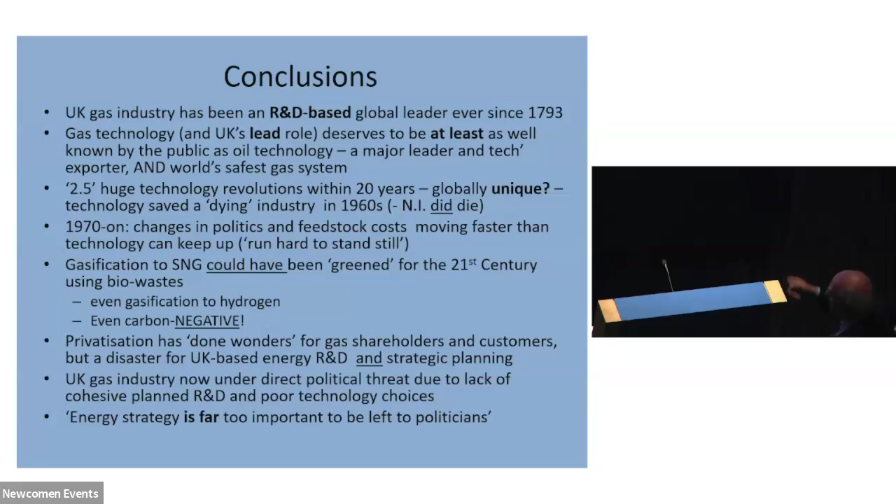So, conclusions. The UK gas industry has been research-based ever since 1793. We just don't tend to apply that term to it. Gas technology and the UK's global leading role in it deserve to be at least as well known by the public as oil technology. It's the world's safest gas system. We've talked about 2.5 complete technology revolutions within 20 years in the 60s and 70s, saving a dying industry.

The problem in all of this, of course, was that from 1970 onwards, changes in the political environment and changes in the relative cost of different things you can make gas from are moving faster than the technology could possibly keep up. You're running very hard to stand still. This synthetic natural gas we were able to make, a man-made natural gas equivalent, could have been greened up for the 21st century using bio-waste. The government has no interest. I wasted 14 years of my time as a private individual trying to kick the door down at the Department of Energy with no success at all.

So, what's the big picture? Well, privatisation has done wonders for gas shareholders, of whom I am one, and one or two of you maybe, and customers have had a very good deal. But it's been a disaster for energy research within the UK, and it's been a disaster for long-term strategic planning of the industry.

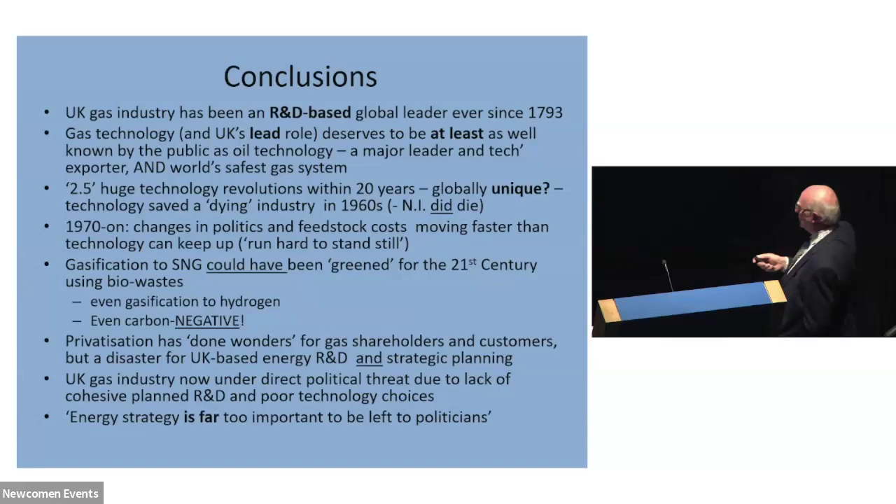And as a result, the UK gas industry is now under direct political threat as I speak, because the government recently decided they're going to close it down by about 2040, and you're all going to be forced to buy an electric heat pump at a price of over £5,000 each. And that's because they hadn't got a credible alternative working together as a cohesive industry. And I've always said for my whole career, energy strategy is far too important to be left to politicians.